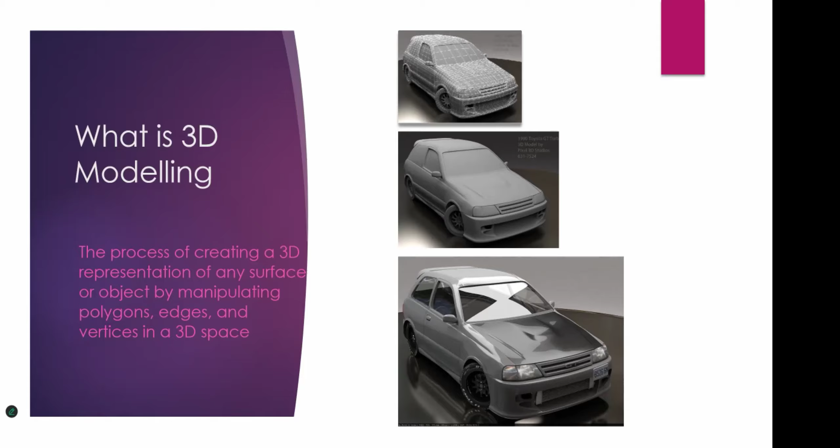You know, I didn't use SketchUp for sure, because what we learn is that there's different types of modeling, and SketchUp is only one of the types of modeling. And you use different types of modeling depending on what you are creating. So I'm just looking for this file here to show you as an example.

Okay, hopefully it will still open because this was a long time ago. Anyway, all right, so we have what's called solid modeling. You have what's called digital sculpting. You have some different forms of modeling, including 3D scanning. This is where you use something to scan something, where technically you're not really modeling, you're just generating the model. So we were doing solid modeling.

And here's the funny thing: there isn't a definite official list of modeling techniques. People will just make up a name. So they'll say, I am CAD modeling. CAD modeling is not even really a type of modeling, but because they're using AutoCAD, they would say I'm CAD modeling. If I'm using Revit, some people would say, oh, I'm Revit modeling, but that's not a type of modeling either. So I'm just saying you're not going to find official types of modeling. Some people refer to a type of modeling in their own kind of style.

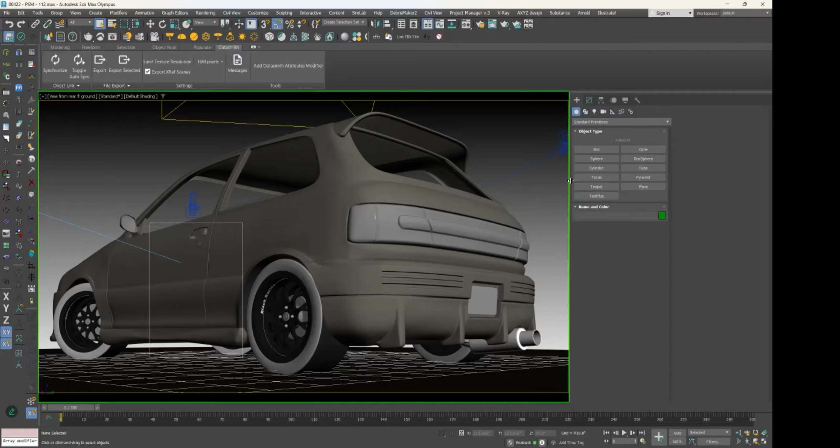This is the actual model. This is the scene for it. There's no insides, it's just the shell, right? And if I go to the wireframe here, you'll see all of the different nuts and bolts and all of that stuff that's there, right? So this is Studio Max, and it was done something like this.

This is another type of modeling called spline modeling, right? And you normally use this type of modeling to get very organic forms, right? So if you had a very organic looking thing that you wanted to create, it would be much harder for you to do that using surface modeling or solid modeling. So you would have to use spline modeling. Of course, SketchUp doesn't have spline modeling.

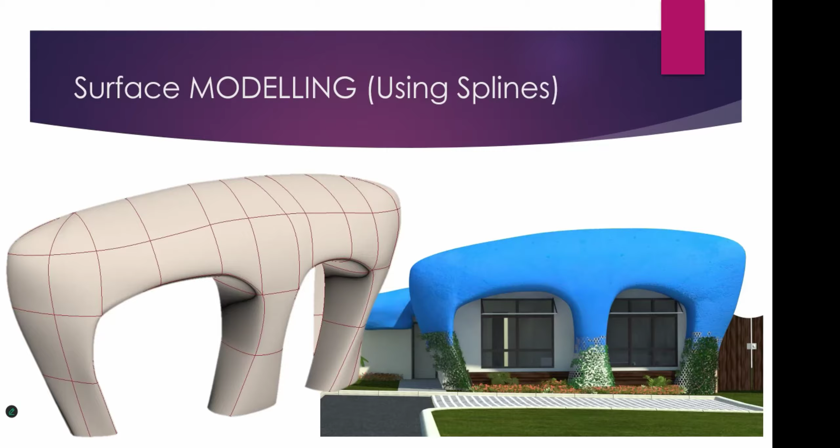This was actually a project that I did a long time ago. It was a facade for a building, and they wanted it to look like something from the Stone Age to make it interesting. But to model this kind of shape, I didn't use SketchUp, and I didn't use Revit, because Revit does a type of modeling called parametric modeling, right? And this is spline modeling. So this was done in Studio Max as well.

This is another type of modeling called digital sculpting, and how that works — well, I thought this was a video, but it's not. Anyway, anybody here paint? Anybody paint for fun? Yes sir. Right, yes, cool. So imagine you have a canvas and you're using your paintbrush and paint, but for digital sculpting, you're doing it in 3D, and it's like clay. It's just that you're not using your own hands — you're kind of rotating the model on screen.

So digital sculpting is normally used to create organic forms — faces, monsters, biologic stuff. You would use that kind of modeling. It's like clay, you know what I mean, but it's just that it's on the screen. So we don't do a lot of that in architecture, but it's a type of modeling as well. 3D Max doesn't really do sculpting — you would have to use a program called ZBrush. Don't know if you've ever heard of that. But yeah, that's just another type of modeling.

Okay, what else do we have here? Procedural or parametric modeling — I know I keep giving you multiple names because different people call it different things. This is what we do in architecture, when you use ArchiCAD, not SketchUp though. SketchUp is not really under this list, SketchUp is more solid modeling. But when you use ArchiCAD, AutoCAD architecture, then fine, Revit definitely — all of these programs are what you call parametric modeling, or procedural modeling.

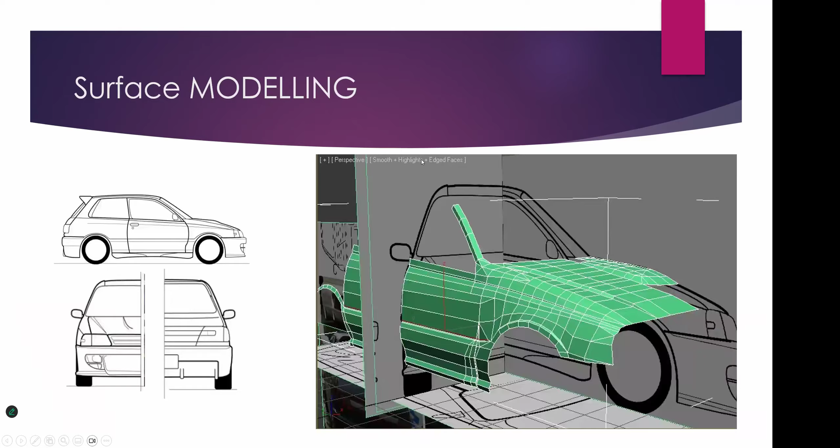All right, so that's just a quick intro to the type of modeling. Now we're going to be doing this one. I want you to whip out your SketchUp, and that's what we're going to be doing.

So the first thing we're going to learn today is how do we sketch in SketchUp. After all, it's called SketchUp for a reason, right? When we used it recently, we weren't really sketching—we were following very precise instructions. So I want us to test out how do we sketch in SketchUp.

And then when we're done with this, I'm going to throw out a quick, like, competition—well, not competition, but I'm going to give you something to sketch and see who can sketch it first.

Anybody here ever used SketchUp before, before this course, this class? A little bit. A little bit. Barely. Okay, that's barely. All right, so you won't be disqualified from our little trial.

But before we go to that, we need to get our hands around SketchUp because it's not just about line work. Last time we learned how to draw lines, turn them into solids, push, pull, subtract, that kind of stuff. But SketchUp can do other awesome things specifically for architecture that will make your life way easier going forward.

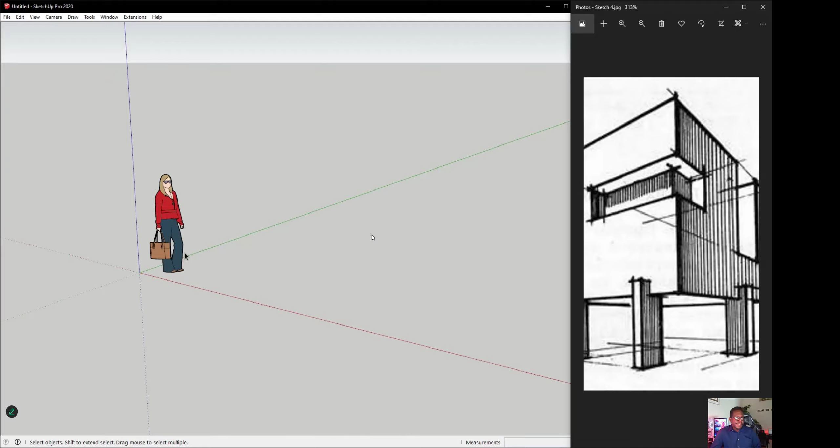In SketchUp, the great thing we do have is a nice proportional figure here. So we have a rough idea of how tall an average person is, maybe 5.5 feet thereabouts. Right away we can use this to judge stories and heights and things like that.

This is important because it is important that you rely on quick sketches. A sketch can get the idea out of your brain real quickly. The 3D will expand on that idea after you create what you had initially sketched. So we're going to look at how we would start with this model here.

Okay, so now if we are to start a sketch like this, the first thing we'd have to do is kind of analyze a bit of what's happening here. For example, we know that this is basically on a square base.

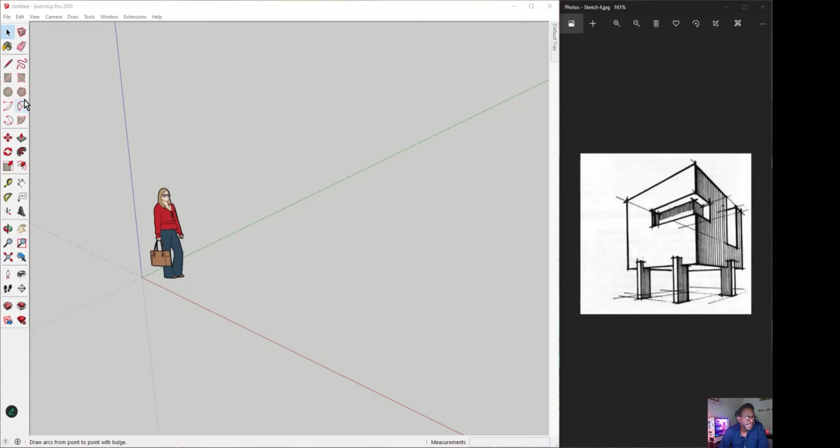So the first thing we could do is perhaps draw a square base, and I'm going to use my rectangle tool that is located here to do this. Now if I use that tool, I'm going to start from the center. Remember, this is an estimate, so I'm going to assume that it is a square. Notice I get that guideline to tell me this is an even square, and I'm going to make an assumption that maybe my building is about this big.

Now remember, I don't really have any measurements. Instead, I'm just assuming that perhaps a person would be about that stature. So maybe this level here is perhaps one story, so it's probably about 10 feet thereabout.

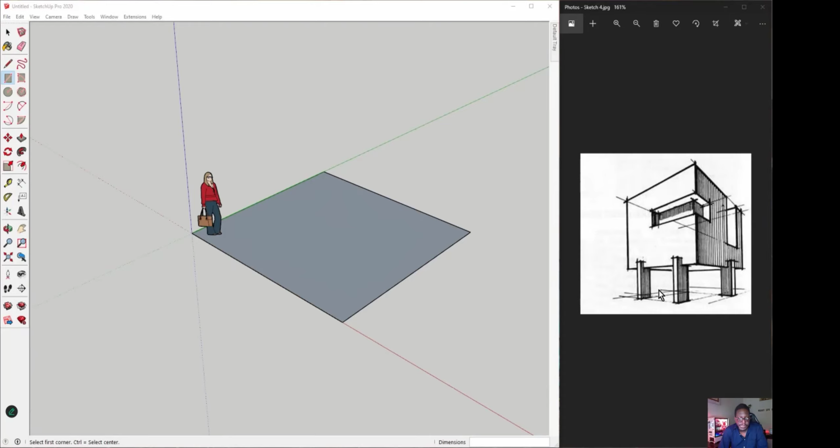Remember, this is really coming from a sketch, so a couple of assumptions would have to be made.

Now, if I look at how the legs are turned, I could assume that maybe there is probably something like that, maybe something like that, and on the other side it's pretty similar. Remember, because it's a sketch, I don't know exactly what's happening on the back side, but I can only assume, and this is the power of 3D. Now we have to start making some assumptions—maybe there's another one on this side, I'm not sure, but we're going to go with that assumption.

Okay, so we are going to get perhaps another rectangle tool like that. Now there is one very important fact that we need to consider when using SketchUp.

SketchUp has what I'd like to term as sticky fingers, meaning—notice I've drawn this shape over here—if I use my move tool, which is located here, and click at a location to grab the object, so I click once. Sorry, let me highlight that object first.

So I'm going to use my selection tool, highlight the object, then use my move tool and click at a location to grab the object, click once, and then move the mouse. I'm not holding down on the button, but just clicking once. Now when I move this here—you don't have to follow me, I'm just demonstrating what I call sticky fingers—and I drop it there.

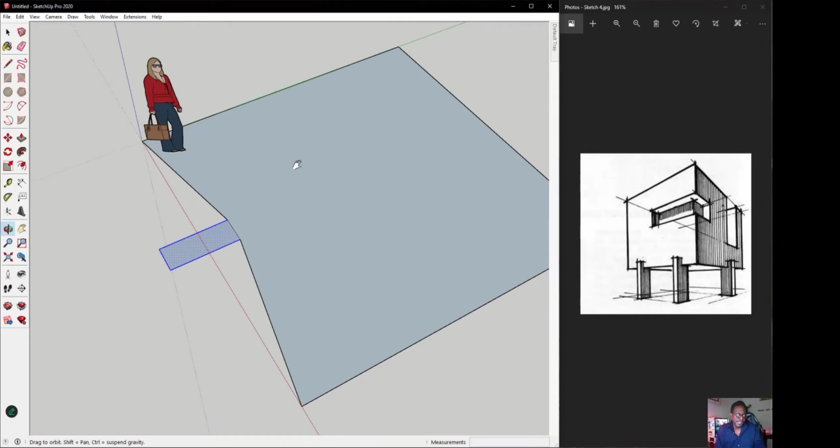This is perhaps one of the primary things you need to understand of how SketchUp works. This is kind of unique to SketchUp because if you use a lot of 3D modeling software, this feature is actually quite weird in my opinion. So anyway, I'm going to undo that. Remember, once two shapes touch, doesn't matter even if it goes inside, it has now become a part of that shape. It's now stuck together.

So what we want to do, to avoid this, is turn this shape into a group or a component, and we're going to look at the difference between the two.

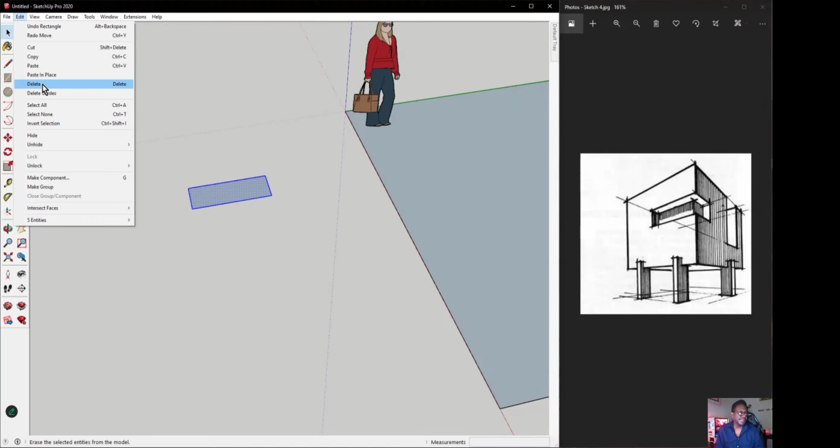Now when something is a group, it's all individual. So for example, I can select this, and let's say I want to make a copy of this. I could do the regular copy and paste. I'm going to put this over here. Now this copy, what I'll do is right click and say make it into a group.

Now notice the different terminologies that currently exist. You can have an object as a group, or you can have an object as a component. So again, if I right click, I can get the option to make it a group or a component.

Now I'm going to make this one a group, and now it's a group. So let me use my selection tool and deselect. If I click on this shape, the entire shape selects.

This is my original over here, and if I click on it, notice that I'm still able to select one line, and I can select another line, and I can actually click my move tool and just move this line alone and so forth. But if I click on this, I'm not able to select one line. It's going to select the entire object, and if I try to move it, the whole object will move. That's because this object is now a group.

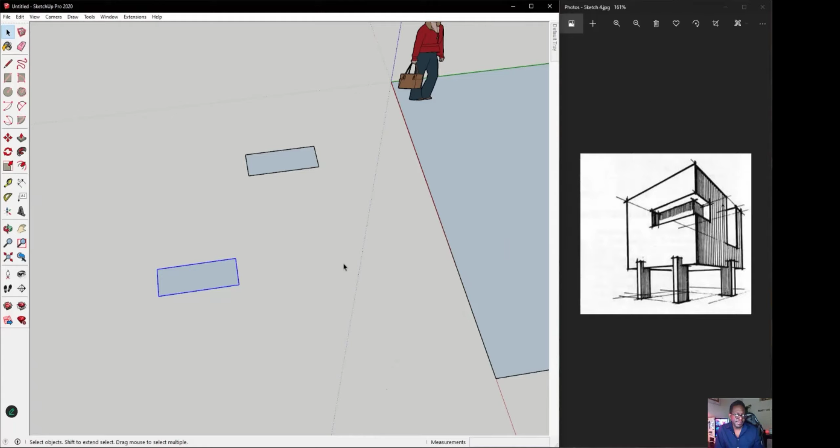Now once an object is grouped, it doesn't suffer from the same sticky fingers. So for example, if I highlight it first and then go to my move tool and move this object here, then voila, it does not stick to the object because it is kind of encased in a group, right? Not exposed to this sticky fingers syndrome.

Now there is another interesting thing about groups, and to demonstrate this, I'm going to copy this original again, so let's keep track of it. This one here is the original, and this one here is a group.

That's G, so that represents group, and this is the original. Now if I select the original, I'm going to do the same thing again, copy and paste that over here. This time I'm going to right click it and make it a component.

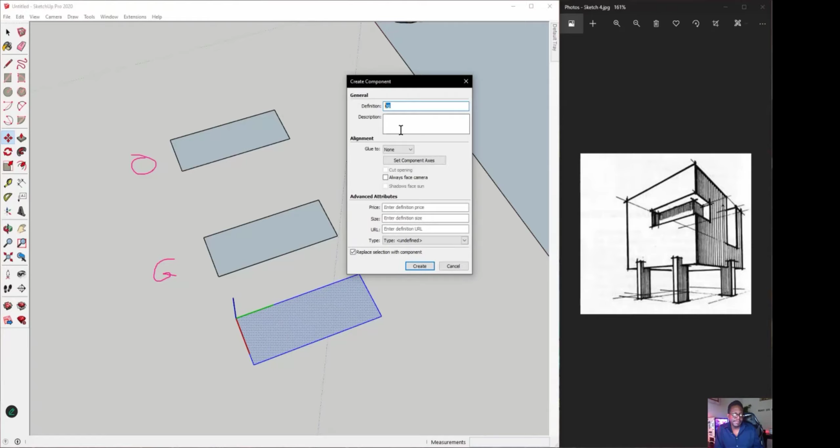Now when I make it a component, it's going to ask me to name the component. I'm going to call this example, because I'm giving an example, so I'm going to name the object example. This is essentially giving this component some properties, right? You can see you can give it size, price, and name. Essentially you're adding more information to this object, but we're just going to add a name called example as the only information. I'm going to go to create.

Now what we have here is a component, so I'm going to put C there because this is a component. Now the interesting thing about components is if I copy the component, so I'm going to go copy and paste. I've now copied the component, and I'm going to do the same thing to the group. I'm going to copy the group and paste the group. All right, so in here we have a component, and here we have a group.

Now I don't need to copy the original, we have been copying it since, but I'm still going to copy it, so I'm going to copy the original here. So here we have the original object. Now the thing about this is, as you know, the original object is really just two different objects, but of course we know when something is exposed as an original object, once it touches anything else, you try to move it again, it becomes stuck. So we know that when you have objects in SketchUp, that is what will happen.

Now of course, if the object is a group and we move it, I'm going to start using the shortcut keys, which is M. And if I move it here, then I can always move it again. I have no worries.

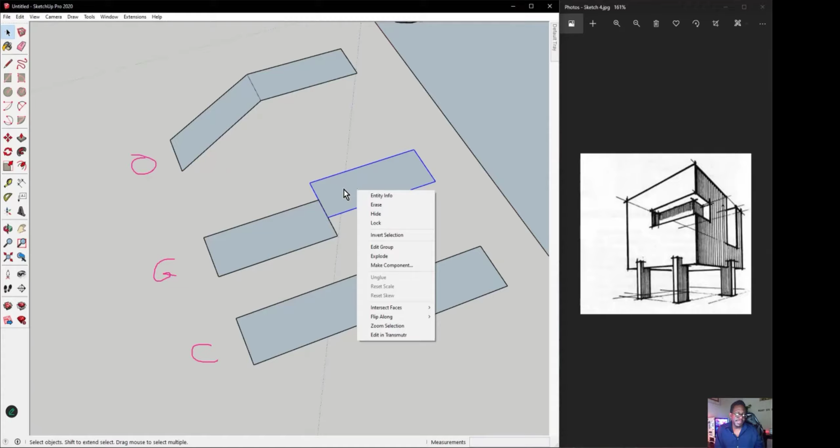So if I wanted to go back and edit this shape, the easiest way would be to double click or right click and go to edit group. Let's use the double click, because that's the most popular method. So I'm going to double click.

Now notice when I go into this group, everything else becomes gray, and this is telling me that now I'm inside this group, and I'm able to select these individual lines, which are the elements that make up the group. So if I go to my move tool, I can actually manipulate this group like that.

Now if I wanted to save this, the easiest thing for me to do is use my selection tool and just double click in an open area. And that is how we manipulate a group.

Now that I've come out of the group, it's a single shape again, and I can just move it around as one element. I don't have to worry about the sticky fingers and so forth.

Now on the other hand, if we edit a component, I'm going to double click this now, just like the group, and I'm able to go in and modify these elements. However, the big difference here is that when I modify one element, you notice both elements actually change.

Now if I come out of this component group, I can still have these separate objects. So I can still move these around and they function as objects. However, you can see that these two objects are actually linked together.

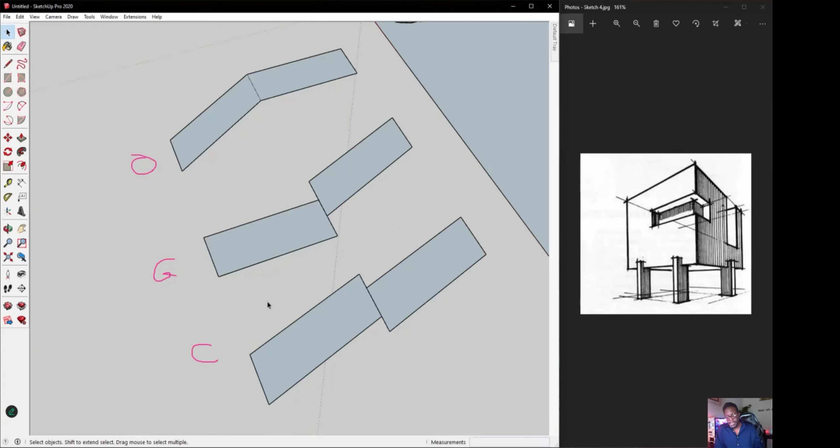So you can think about things that repeat, like balusters or columns, and there are many other uses for this feature. You might need something grouped so they don't stick together, but in some cases you don't want one change to affect all of them, and in other cases you do want that. So these are the three examples between group, component, and just a regular object in SketchUp.

All right, so now, pretty cool, guys. Everybody understand that concept? Yes, sir. All right, cool. I know Levy understands, but what about Rutan? Can you hear me, Rutan? Yes, sir, I'm here. You following? You understand that concept? Yes, sir, somewhat, for the most part. All right, cool, very important going forward in SketchUp. All right, cool, let us proceed.

Now that we have that example down, we can start to plan how we want to do these columns. I would make these columns as components because they're going to repeat. So in this case, I would draw one of the columns first, and notice that I'm drawing it on the outside because I don't want it to touch this element yet, or else it will stick.

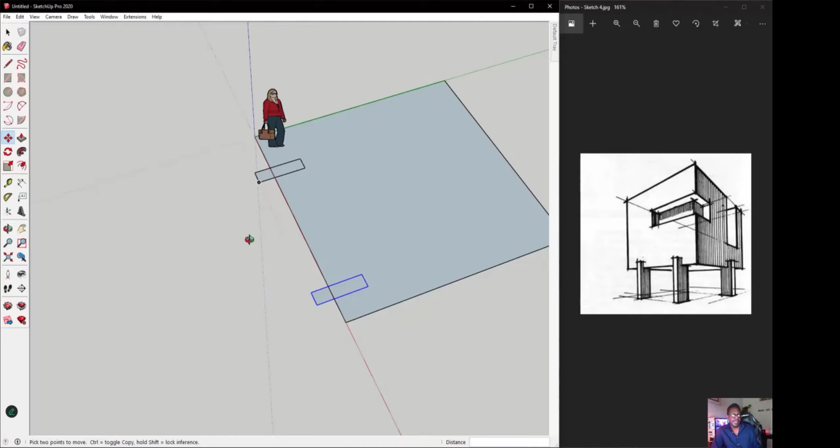And I am going to put another column on this side.

So then what I would do is copy these now. There we go. Then I would rotate, using the rotate tool here.

The rotate tool can be a little tricky to use. How it works is you need to first position the protractor with the first click. The next click is to rotate the protractor, so I'm going to rotate it this way. The third click is to rotate the object according to the protractor. So you have to do 3 clicks to let the protractor work.

Now there are some additional techniques with the protractor, but we'll touch on them as we go along further.

All right, so we are going to move this one back here, and this is representing this back column. All right, so these are all components, so the idea is when we extrude one, all 3 of them will change. Now you can keep an eye on what these objects are in case you don't remember if this was a group or component.

You would find that in your default tray under entity info. When you expand that, you would see it says you have a component selected. If I selected this object, you would see it says you have a face selected.

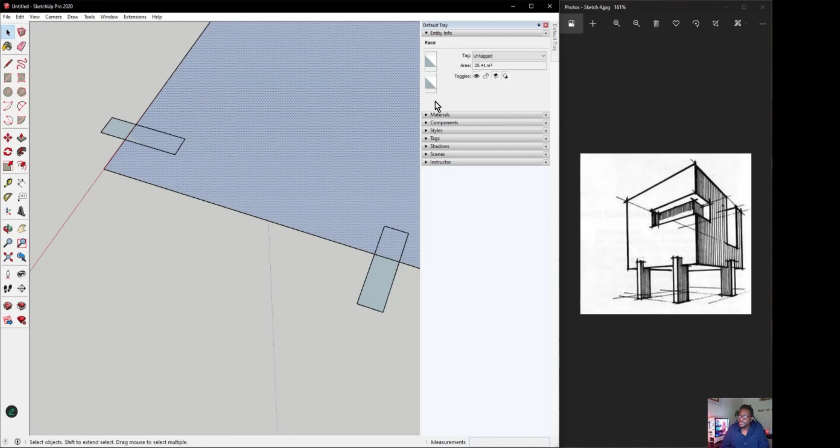Okay, the next thing we want to do is figure out what we're going to do for the back. So I would say we copy these 2 guys, select these 2 items here, and copy that. Control C, Control V. There we go, and we're going to just hover here and use the polar snapping to get the angles right. And then I'm going to assume there will be another piece like this.

What's up? Yes sir, it seems like my polar snapping is off. How can I turn it on?

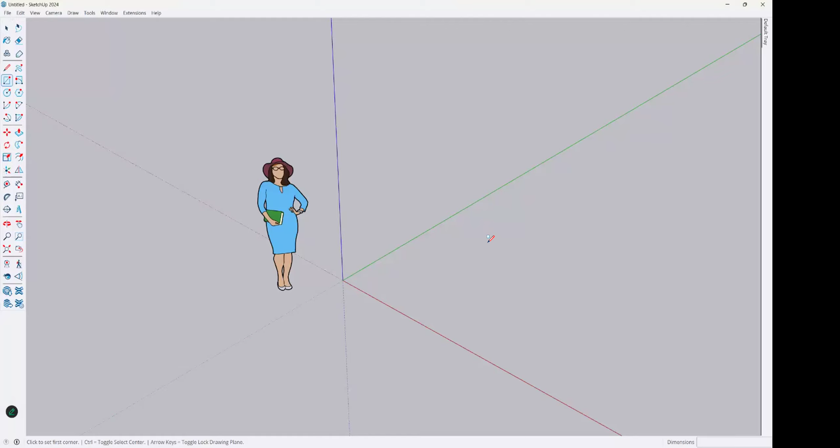You don't really turn off polar snapping, but you can turn off snap. So polar snapping can be a little tricky, you have to kind of... so when you have your shape, you have a shape here, so...

Let's make this a group. So when you move it, you're getting this dash line, right, when you move it. It's working now, sir. It's working. Oh okay, cool.

How can I have the column equidistant from the center? You're sketching, man, don't worry about that. You're sketching, sketch. Cause when you're drawing on your piece of paper, you're not worried about all them things. All right.

Control C, Control V, and I'm going to copy that maybe over there. All right, now we have those.

We need to extrude this now, and to do that we're gonna double click so that we can edit this group. But the idea is, because these are all components, we're able to extrude one and extrude all.

Now if this is going to be the height of a floor, then this is probably going to be about this high. We're going to use the selection tool. So guys, don't even try to type in a height for those columns, just use the figure you have in your SketchUp model and just judge, say it's supposed to be about this high. Remember, we're sketching in 3D.

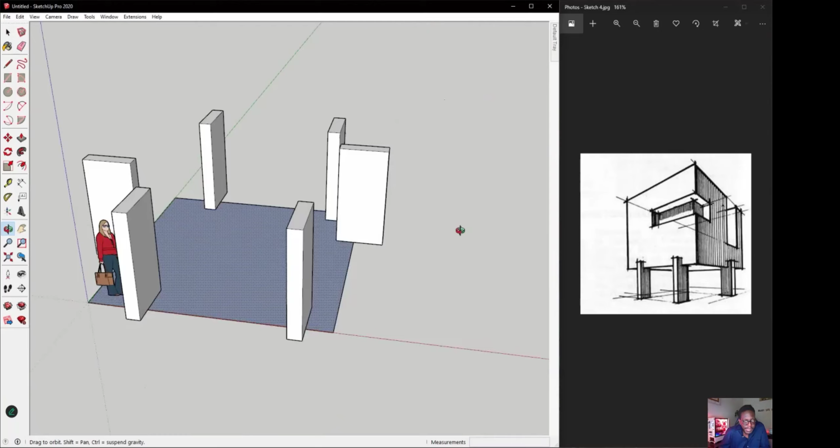So let's do that. We're gonna select the base here, and then we're gonna copy it upwards. Now there's a trick to doing a copy in SketchUp. If I go to... there's actually a... let's go here, and...

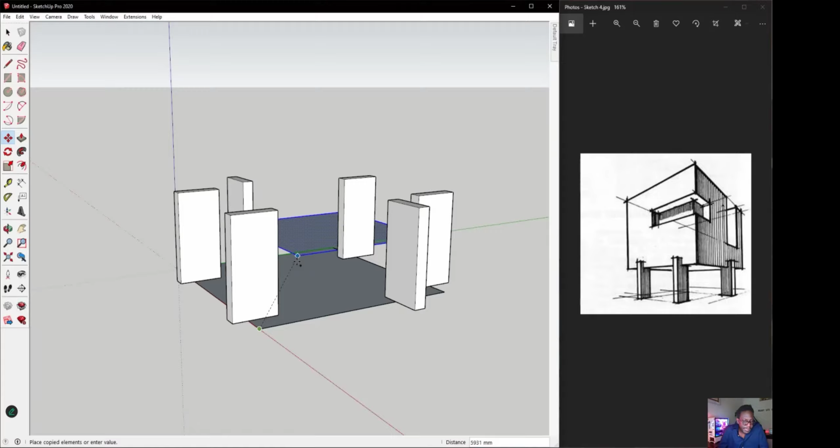Now to copy in SketchUp, what you want to do is, well first we need to select what we want to copy. Now we have been copying using Control C, Control V, but we can also copy using the Move tool and holding Control while we move. So in this case I'm going to grab this corner like this, and here is the trick: in order to copy this going upwards, I would need to orbit so that my view is mainly flat, and that way, remembering to hold Control, I'm able to copy this going upwards like that.

So then I would have created the base of this object, which is that element there. So what is left for me to do is to extrude this object upwards.

And I would say maybe this is about 3 times the height, maybe like that. Remember, what we're doing is creating a kind of sketch.

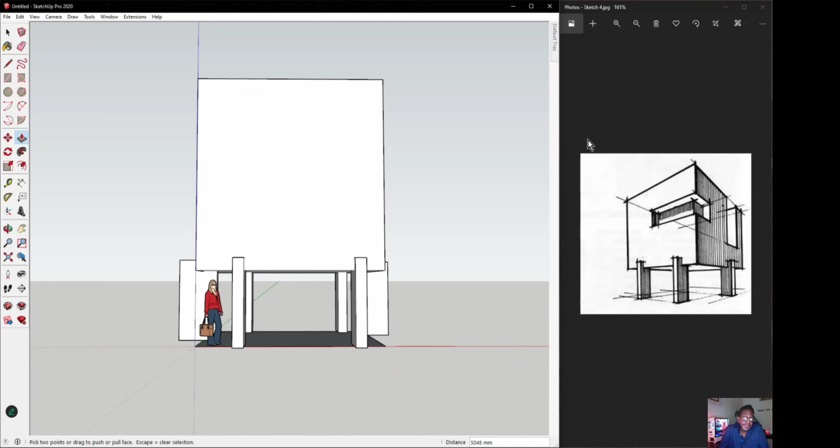Now another interesting thing is that the perspective on this shot is a bit different. So in order to allow this to look like this, we would need to adjust the angle of view, and we can do that by going to Camera and Field of View, and we're going to click, hold, and drag. Now as we drag, you see that we're getting more of a worm's eye view, right?

The building is becoming more skewed, which is a little bit similar to this view here. Now the next thing we want to do is go back to the Move tool, and we want to start to cut this window shape out. So to do that, we're going to use the pencil tool, and draw on top of this, using the axis to guide us, so we know we are going vertically down and horizontally across on the X. We're going to do the same thing for here.

There we go. All right. You hearing me? Yes, sir, I can hear you now.

How did you make it skewed? When you say skewed, what do you mean? Yeah, I think you went up top to select something and kind of made it look like you changed the FOV. Oh, the field of view. Right, yeah man, it's on the camera. Sometimes I get these mixed up. Oh, I see, no, on the camera, yeah man, it's supposed to be on the camera. Yes, I found it. Found it? All right, cool. Yes, sir.

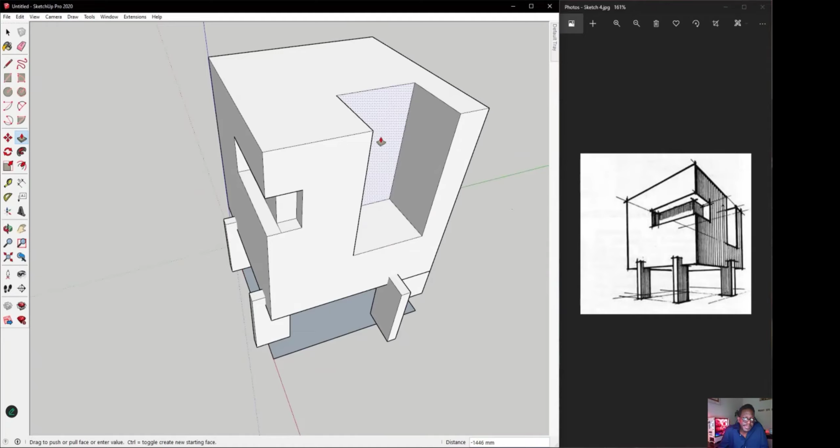Alright, and see, that was pretty simple. Now what I want you guys to do is try and imagine what happens around here, because remember, we only sketched what happens here. So I'm going to leave it up to your imagination to come up with suggestions for what happens here.

All right guys, anybody else following? Anybody else manage to follow as we model this out? So I'm about to push in the big rectangle on the right side of the wall. Cool, cool, cool. What about Raheem? How you doing, Raheem? Is Raheem here? It's coming, it's coming, it's coming. Matthew?

I'm going to have to watch your recording because SketchUp is currently installing for me. Okay, remember this is what I'm doing, you can use the web version, because everything here is still in the web version. But as we proceed, we're going to go into more advanced things.

Anybody else following in SketchUp? Anybody else? I know Gianna said she was working on her SketchUp. But nobody's messaging anything. What about Carla? Carla, say again? I'm getting through fine. You getting through fine? Yeah. Okay, cool, alright, no questions. I'm getting through, sir. Alright, cool, cool, cool.

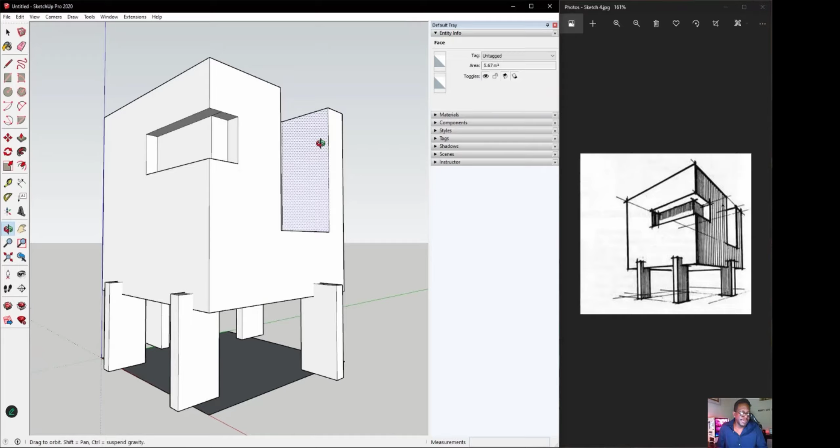Now, while that is done, we're going to use this opportunity to explore some of the features of SketchUp. When we're using SketchUp, we're going to go to our default tray here, and this time I'm going to pin it. So we haven't really been using this tray, but now we're actually going to start using it. Now I am going to look under, let's first take a look at some features.

So if I look under Shadows, I'm able to turn on my shadows using that button there. So what I need to do is click it, and notice that it's pressed, and then you can see the shadows on my screen. There we go. And I can adjust that shadow by adjusting the time of day.

I can even adjust the areas in shade, how bright or dark it should be, and the areas in light. All right, so that is a quick idea of how we get shadows going.

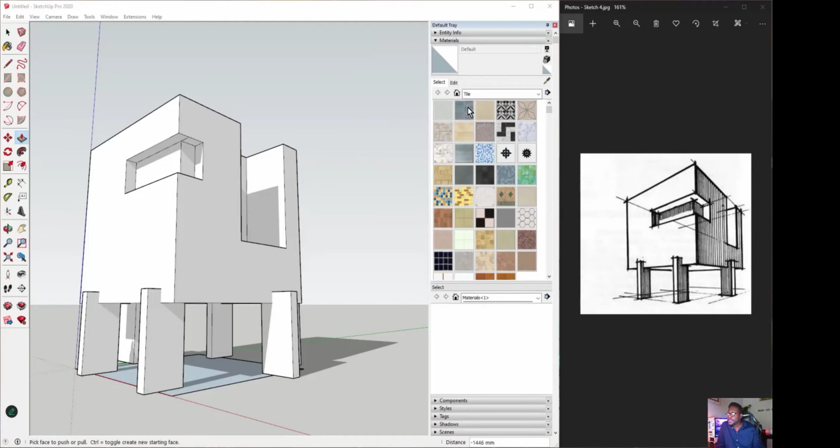Now the next thing we want to look at is our materials. You may have some materials built into SketchUp, however the materials shown here may not be included in your version. But let's not worry about that. What we're going to do first is just understand how this material tab works.

So if I take a look at this tab, yes, there are default materials here, and there is a preview window. When you click on any material or color, you will see a preview of it here. There are some icons along the side, but let's go to this drop-down menu, which shows categories of materials we can choose. Depending on your version of SketchUp, you may not have all of these categories, but we're going to start with one we all should have: the color category.

If I scroll through, you would see quite a bit of colors here. Now what we're going to do is try some earth tone colors. So I'm going to go for that color there. Now in order to apply this, you will need to have the paint brush, the paint bucket tool, selected.

Sure, this paint bucket tool works very well.

Yeah, man, what's up? So that's solid colors, is that one? Yeah, use the solid colors on your end. Oh, okay, okay, so you should see all of them there. Yes, sir.

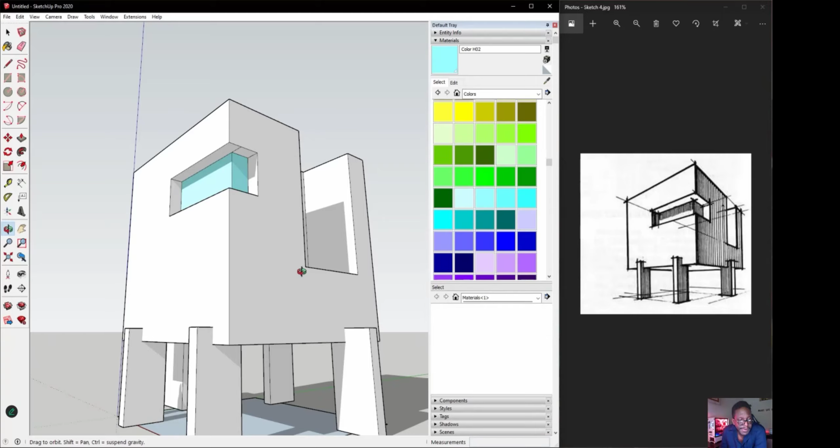So let's go back to our earth tone colors here. I'm going to choose something a bit light, and I am going to actually fill these areas in.

There we go. Now I believe this area is actually filled, but what happened is that the sun is a bit too bright. So let me go back to my shadows tool, and I'm going to adjust the brightness of the sun. Can you see that? If I made the sun really bright, it basically washes out the color. So I'm going to put it back at about 50%.

All right, let's color the insides. And let's get another color for the columns that we're doing here.

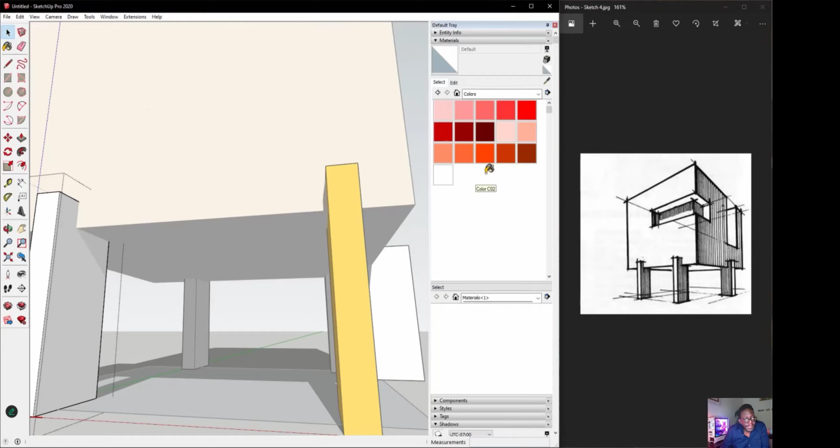So we're going to go to materials, and there we go. Now, of course, even though these are components, I can still color them differently. However, if I was to go inside one of these groups and then color the material, let's do an example here: all of them will have the same color, and it would actually override the color that it is given.

Because remember, these are components, so the idea is when you apply the color to one, it will apply to all. Alright, so that is just a quick idea of how we add color.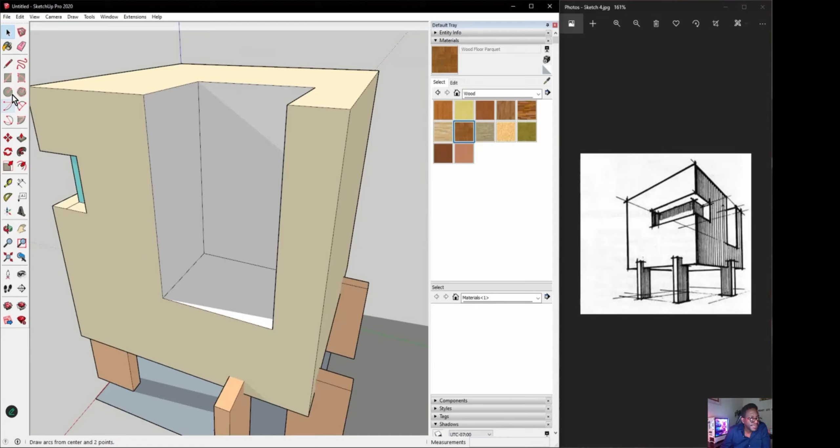Now texture is pretty much the same thing, so let's go to wood, and I'm going to choose a texture here, and pick the paint bucket tool. Oh, actually it's not applying because I'm still inside the group here, so I need to double click, use my selection tool and double click. There we go, and now I am able to apply material.

Now, as we get a little deeper in applying materials, you might want to change the scale of the material. You might say the scale of this wood is too small, I want to make it bigger. Now in order to do that, this is when we start to go into the properties of the material.

So we'll now need to go over to the edit side of the materials category, and under the edit side you can see a couple options here. First, you can see where the texture file is located, you can see where you adjust color, and the scale is adjusted by these two values here.

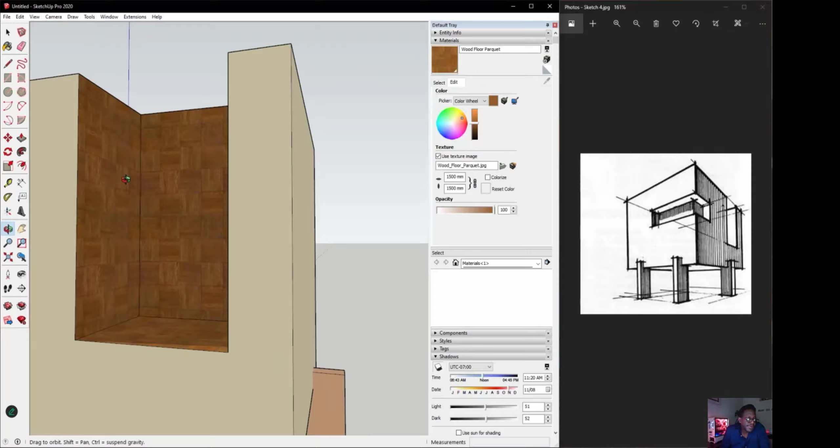So we're going to lock this. If we increase the size here and make it 900 by 900, you will see that the size changes. Let me give you an example. If it was 300, you will see the size change instantly. Let's try 1500, so you can clearly see now the texture size is much bigger.

Now, in addition to changing the materials, you can also create your own material. So let's create our own color. We're going to go back to select, and back down to color. Let's assume that none of these colors are ones that you would like.

To create your own material color, you go to this icon right here, and that icon will bring up whatever material we currently have selected. So we are going to maybe select white, and then bring it up.

Now it's going to show us a preview of what we have selected, but we can rename this. We can call this Brian's Red, and then we're going to pick a color. If we wanted to, we could use a texture, but we're just going to choose color for this, and choose OK. Now you see we have a color called Brian's Red, and that color is saved in the model. Now we can simply just apply that color to our object, and that is a simple way to add color.

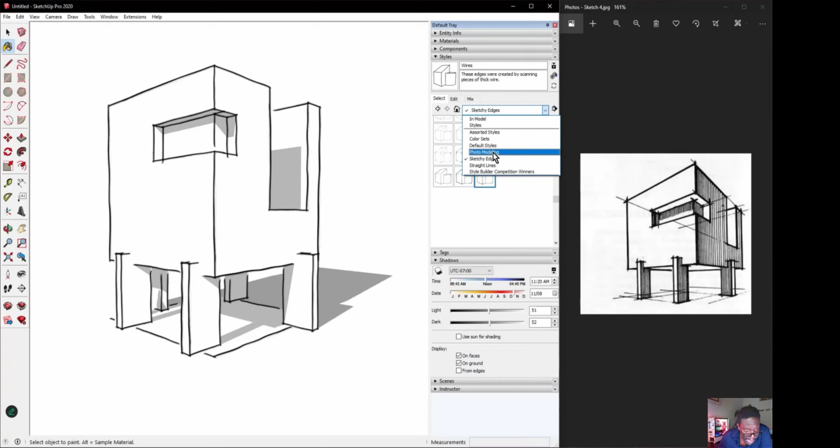Now things start to get interesting when you change it to, for example, Sketchy Edges. If you check out these styles, they kind of look like a sketch, which is pretty awesome. You can try the white and black, and you even have some with color, right there. If you see assorted styles, for example, this is another interesting one here. This one kind of looks like a marker.

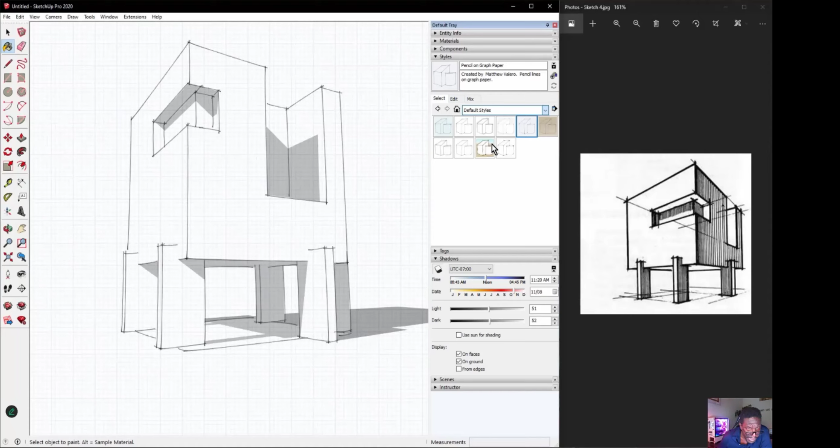And if you check out this category, Style Builder Competition Winners, you must be saying, wait a minute, you can actually build these from scratch, right? These are styles this person has built and they got featured in SketchUp. So if you want to build your own style, you're going to use the Edit tab. To see how this works, let's go back to default and put back our model on the first one, which is pretty much the default that SketchUp starts with.

Now when you go over to Edit, notice these main categories here. The idea is that in each of these categories, you would edit, and the full combination of editing each one creates your own style, right? So let's check that out.

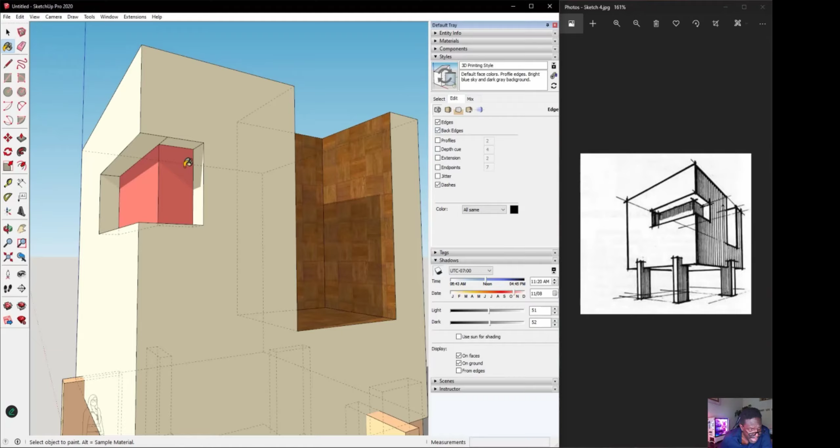If I go to the first option here, it's all about edges, and I want you to look at these edges as we change this. We can, for example, say no edges, and if you notice, there are no internal edges, no profiles. Now you see there's no profiles there. We can turn on edges, we can turn on back edges — you can see the little dash lines there for the back edges. Then you can turn on profiles, and profiles gives the bounding outline a particular thickness, and you can increase this thickness.

Let's put it to 7. Here we go, you can see a kind of thick outline there. Depth Cue kind of adds the line changes depending on how far it is. Then we have extension — this one is pretty cool. Let's put that to 7. To make you see it, let's put it to 50. There we go, it creates these extensions. You have endpoints, which kind of adds a little bulb to the end.

And then you have jitter, which basically allows the lines to look a bit more sketchy, as you can see here.

So you can come in, and all of these options are just about lines, and of course you can change the color. Now the next thing is the face settings, and each one of these has its own settings as well.

When we go to the face setting, we can say what is the front and the back face. Now, as you can see, this face has materials because we actually applied materials. So the option that we select here is shaded faces.

But if we select wireframe, then you would only get the wireframe. It can be white, and then when the faces are white, all faces would be determined by this color. So if I put this to red, or blue, well we see where that comes in a bit further down.

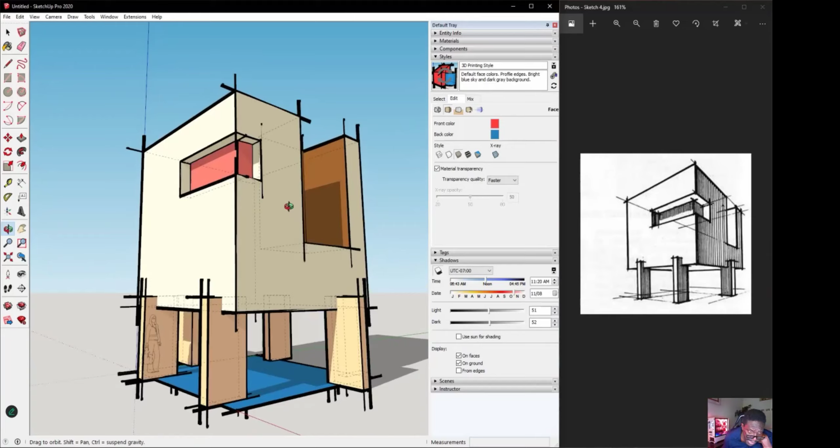But this is where all faces are practically monochromatic. And here we show all the faces. These faces have material, that's why you're not really seeing the material come through. But notice this base change to blue, and that's because we actually did not apply a material to it. So if we didn't apply material here, it would get these default colors.

Once we turn on this option... so how do I pick off this style? Just choose the default style. Or you take off the style, so you go back to the Default Tray, right here, and choose the default style.

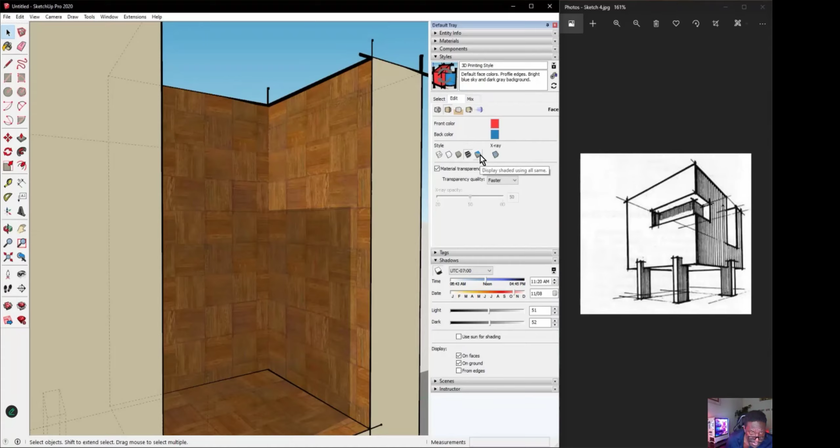Notice that it now shows texture. So this only shows color, and that shows texture. And of course this makes it all the same color based on what we select. Then X-ray mode allows it to be semi-transparent, and you can combine that with any one of these modes, so you can imagine the kind of variety you can get.

Then we want to speak about the backgrounds. Currently the sky has a kind of gradient, and the ground, well, we can adjust what the ground should be. We can also adjust the background here, but right now we have the sky. If we didn't have the sky, we would have just this background. If we didn't have the ground, we would have what we have here. So we're going to leave it on the ground, and that is essentially what this area does.

Now watermarks is what we're actually going to use to complete assignment 1. The idea of a watermark is that you apply an image that can help you align this image. We're going to look at watermarks more when we start looking at compositing, meaning mixing a 3D image with an actual photo, so we'll cover that in the compositing topic.

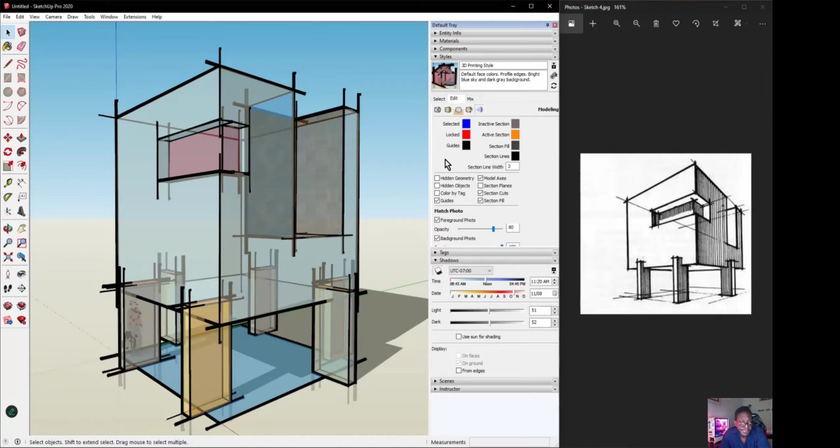Now, if we go over to mix, what mix does is, if you liked a particular style—let's say for sketchy lines you love how this line looked—you can drag this and drop it over the edge lines, and you will absorb the line from this style. Let's look at another one: say you love how the background looks here. You can drag this image over background, and it will grab whatever was used in this image. That's an interesting way you can mix the styles together.

Now, if you like what you've done here, you can save your style. So I could call this BDW style. There we go, and that way I can come back to it anytime.

So that was a real quick look at how we can model elements in SketchUp and simply model from a sketched image. Really simple, really intuitive, and how we can use styles to really enhance our drawing.

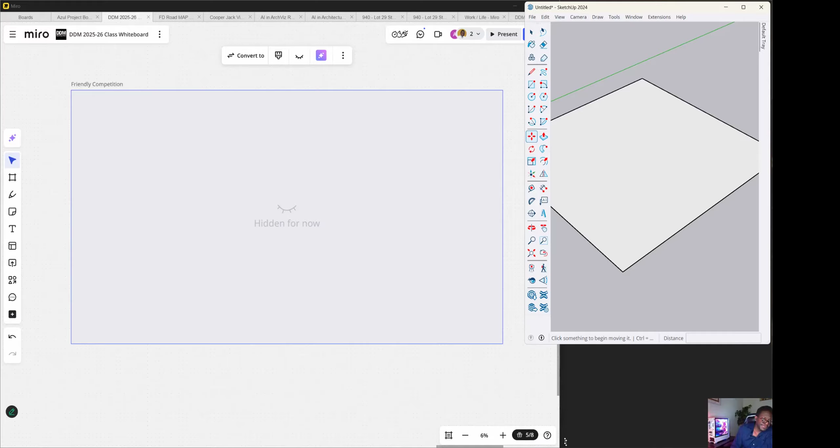So what I want you to do is to open up your SketchUp. So I see I have my SketchUp right here. I'm going to just minimize this because I don't need that. SketchUp right here, all right. And so we're going to go to File, go to New. So we have a blank SketchUp. Doesn't matter the units, guys, because we're sketching, right?

All right, I have a cool 3D mouse here, which is pretty cool. I'll show you one of these days, but I'm not going to use it. All right, I'm going to use mouse and keyboard like everybody else.

All right, now what I want us to do is I want us to whip up this sketch very quickly. All right, ready? In 3, in 2, and 1. Everybody ready? Yes? Yes sir, and go.

Pick anyone you want. Very rough sketches here, guys. Anyone you want, I want you to just whip up what you think this sketch is. I mean, obviously it looks like some kind of a tower, but don't bust your brain too much on it. Remember, it's a sketch, all right guys? It's not supposed to be, you know, we're not worried about dimensions and all of these things. All right, so I want you to just kind of whip that up.

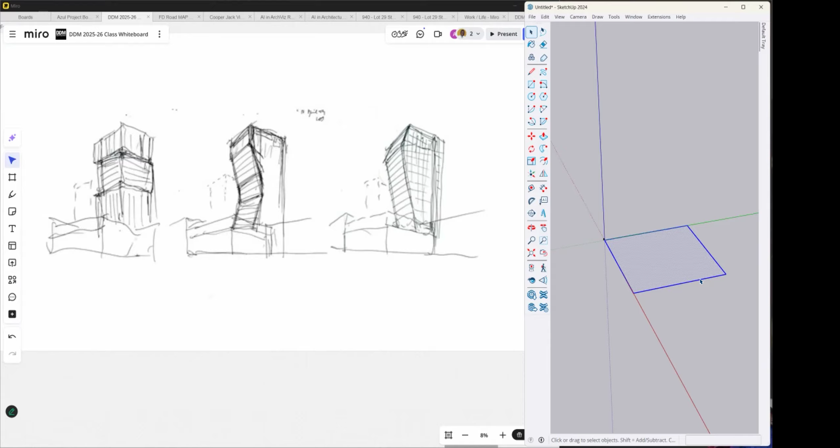All right, I'm going to also do the same. But I'm not really in the competition, I'm just building. No, why am I building? Then you're seeing what I'm doing, I don't want to show you. I'll put it over here. All right, you guys come up with your own thing, I will build mine over here. All right guys, 2 minutes.

Not done yet? Just make up stuff, guys. Just make up stuff, it's a sketch, it's not supposed to be logical. Any one of them you want to do. It needs to kind of look like it still, all right?

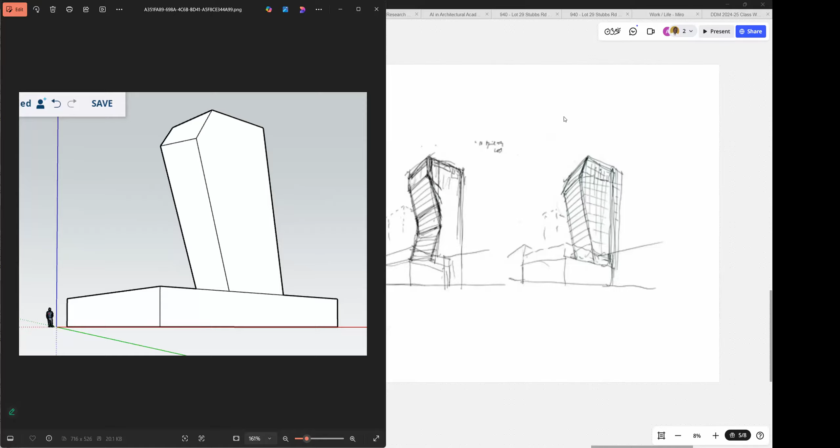Gianna, where's your screenshot? All right, cool, I see yours. I see it. All right. Where's everybody else? Oh, hold on. Couple seconds, sir. Couple seconds. All right.

I finished, I will submit now. Screenshot in the chat. Okay.

How's the trackpad treating you? Painful, sir. Painful.

Everybody tackle the same one? Okay. Which one is that one? Oh, that one? The one on the right. No, sir, I did a different one. Yeah, different one. All right, cool. Okay, so there's mine. All right, cool. Got you.

All right, Tara, while you submit - okay, so I have 3 concepts here, right? I also modeled it as well, right? And let's assume that this took, the last person to submit was Levy, right? So let's assume that this took 3 minutes, right?

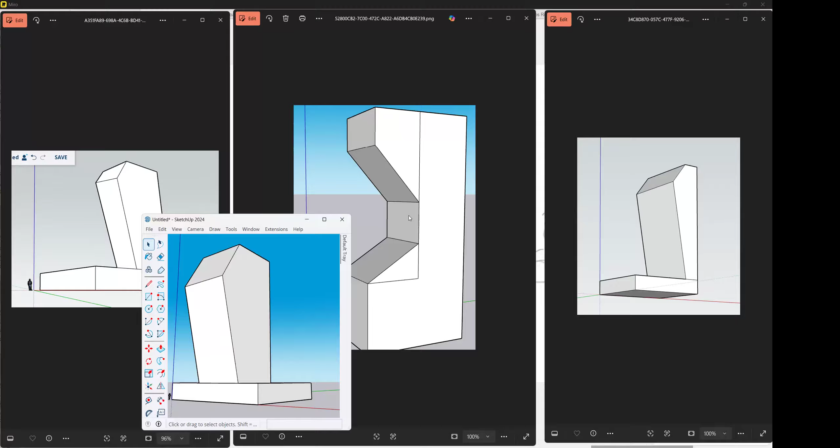So I'm gonna put this over here, and I'm gonna put this sketch over here. So now let's say that you did squiggle up this sketch - there used to be a guy in our class who used to call him Wiggles.

And the reason you can just drop the - what is it, Tara? I'm just gonna screenshot my screen and I'm gonna save. Just gonna screenshot and drop it in. Sure, no matter, it's just a sketch, man. It's like something in your sketchbook. Sir, yeah, I did the first one. Yeah, well man, drop it. Oh, I see it, cool. No problem, yeah, I see it here. Yep, I see it there.

Cool, right, so what I was saying is that, oh right, I was telling you about a classmate called Wiggles because he was really good at doing these kind of sketches. We call it, you know, the wiggle up sketches, so we end up calling him Wiggles. Yes, I see it, there it is. Tara, I see it.

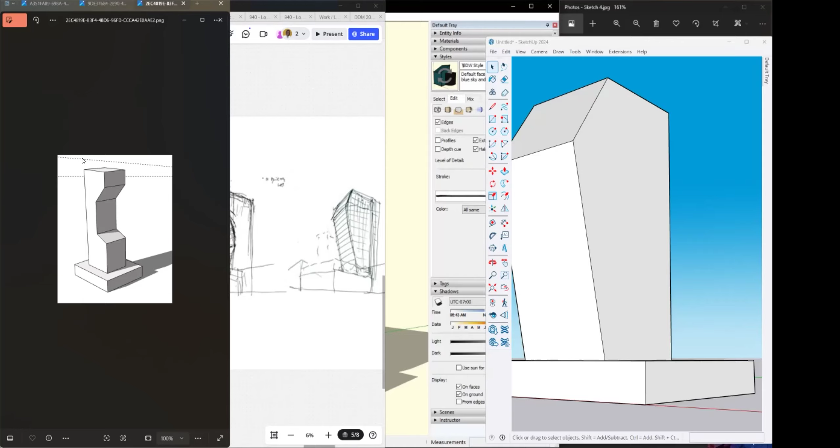Right, so whenever you have these wiggle up sketches, maybe for you guys to do a sketch like this probably took you 30 seconds to do one of this with like a pencil or pen, is done, right? It should take the same amount of time in SketchUp. The key is to try not to overthink it too much, right?

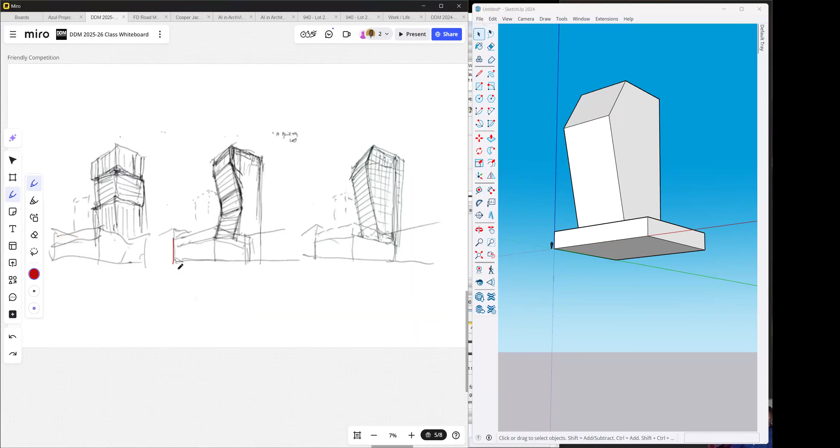So let's look on this second one here. I think it was Levy that did this second one. So the first thing to recognize is always break down what you're sketching into shapes and then make the shapes proportional. So right away when I look on this, I see some that's a little skinny - make this bigger, right, let's make this a little smaller. Smaller.

Right, so let's say I'm looking at this one. The first thing I see is a box here. Forgive me, I'm drawing with the mouse. This looks like a box. I see some business at the top, some kind of double line, but for now it's just a box. Let me draw it a little less ugly. And then below, I see another box that does this fancy thing, but really and truly, this is just a box too. Everybody see that? Just a box.

So if I was exploring this concept, the first thing I'd want to do is identify the main... what's the word again? It escapes me. Primitive, right. I identify the main primitives. Triangle, circle, sphere, diamond, those are primitives. They are like basic shapes. So these are just two boxes.

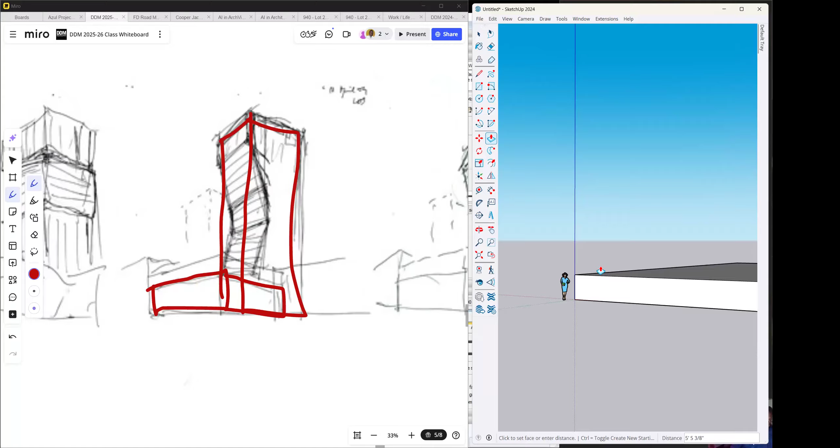So the first thing I would do, let me delete that. I would draw this box, then that box. So the first box, I'm going to just start drawing it here. Now I don't know the size of it, maybe it's this big. And I'm going to use my push-pull tool, but the height is important because if this is the height of a person, maybe this is 1 story, could be 2 story. I'm going to estimate it at 1 story, so maybe it's like that. I am going to just leave it at that.

Then this thing here is another box, right? And what I would try to do first, I would double click this and turn it into a group. Why would I turn it into a group? Who can tell me? Sure, so you can attach it to a next block without distorting it whenever you decide to move it. Right, I think I know what you're saying, but you can just say the word sticky fingers. You don't want to model something and have it stuck to it, right?

So this box is here, and then there's another box. Now what I would do is use the rectangle tool. Notice I use it a lot. I don't know where this is in relation to this, but let's just assume it's somewhere down here. I can even draw this box separate, or assume it's on top of this box here, doesn't really matter. At the end of the day, this is a box, and I'm going to extrude it just the same. Now how far am I going to extrude it? I don't know yet, but based on the proportion of this to this and this to up here, so...

And the trick is that I want to use the same kind of view as my sketch, because that is how we perceive things in 3D. So usually I would want to go and mess around with my field of view, and I want to make it like the same kind of thing.

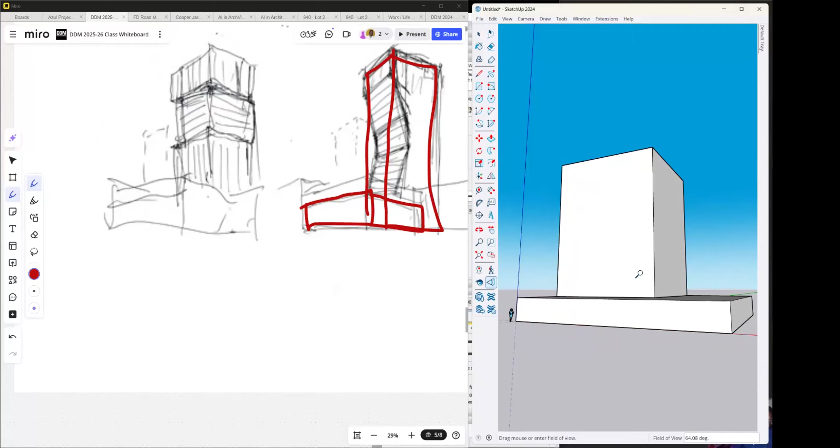Well, it's a little weird because I have... let me try it, dude, carry this over some more. Yeah, so that is not the tool. Yeah, so I would try to get the same kind of field of view like what I have here. In this case, this is more down.

Now what you can do in SketchUp sometimes, because you're going to get this weird perspective, you can go to view, to camera, and you can turn on 2-point perspective and down. That way it keeps everything vertical, just 2-point. And then once the views are similar, it's easy for your imagination to build on top of this, so you can say, alright, this thing cuts out somewhere in the middle.

So what I would do, I would grab my pen tool. Actually, this is even a bit more skinny, or this is taller, one of them. So I'm going to use my push-pull tool and kind of push this in, maybe push this in some more, so it's looking a bit more skinny like this. This guy here needs to come more to the front. So I'm just using the view that I have here, right?

Now I might have to orbit it a little bit. And I'm going to have to reveal this new feature for now, but I will expand on it in a little bit. So what I would do when I get the view right, I would save a scene. To do that, I'm going to go to my default tray here, and go down through all of these things here to scene. I'm going to click the plus. Don't worry about what I'm doing, I'm going to explain a little later.

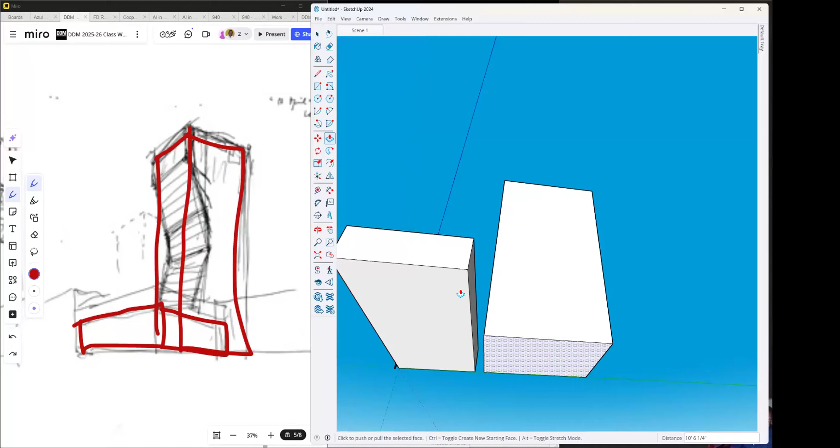All right, so let me go here. All right guys, is it looking more similar? You following me? Yes sir. Right, now the only secret to this is that I'm trying to build it while making it look similar to my sketch.

All right, so this part here, now all I need to do is maybe take my pen tool, cut across here, maybe like that. But you see, before you start to add detail, you want to make sure you get the massing nice. So I think this is a little shorter, so I'm going to just push pull this up some more.

I think here, so I'm going to just push this over some more. So yeah, now it's looking a little bit more similar. All right, so I'm just going to use my pencil tool now, and I'm just going to drag this over like that. And I think there's a point here, something in the middle, and maybe there's a point here, I don't know, I'm just making it up.

Then I'm going to click this point and just use my move tool and move this back, right? And move it back to like maybe, I don't know, here. I'm sticking on the x-axis. Now this is a little fat here, so I still need to carry this back some more, so I'm going to use my push-pull tool and carry it back somewhere. Go back to my view here.

Right, now what you realize guys, it's very, like if I wasn't in the same view, it would be hard for me to even estimate what is happening. The secret is that you want to be in a similar view to your original, because this drawing that you did here is based on your imagination. And when you are having an imagination thought, it's not really bounded by logic too tough.

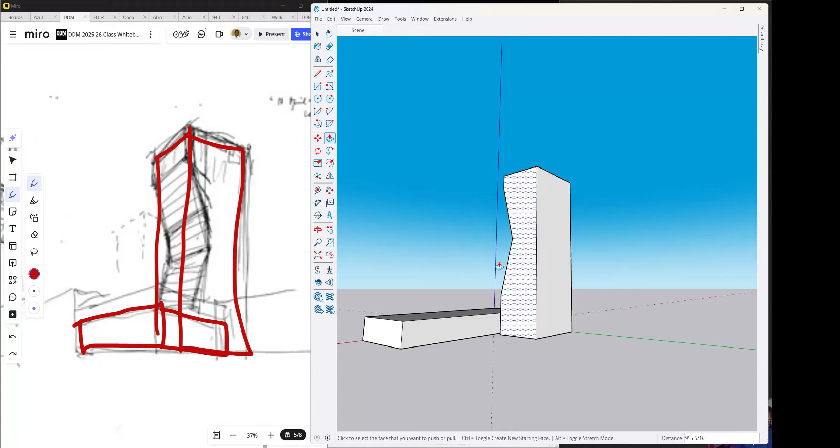It's just your imagination. But when you are in SketchUp, you're kind of bounded by logic. You're starting to say, oh, how high is this? Hold on, how far is this from here? And how tall is it? But when you are in your head doing this sketch, your brain wasn't doing all that stuff, right? So at this point, you're basically done.

Now what I was saying earlier is that now that you have produced this in 3D, you are now free to add on top of this. You have achieved what you imagined first, and then you start to add to it. So maybe you say, no, all right.

Right, so maybe you want to expand this here, and maybe you know you're going to start exploring. Let me use the offset tool. Maybe you want to explore some kind of interesting element here, do some fancy push pull, you know what I mean. And then, so what you're trying to do now is you're trying to build on top of this.

And as I said, sky's the limit with this, guys. You can just go to town exploring all sorts of ideas, but you can only do this once you have it in 3D. When you're stuck in this sketch, you're kind of stuck with it. So my advice is that once you have your chicken scratch sketch like this, recreate this exact chicken scratch sketch quickly in SketchUp, and then play with it. Push and pull it and play with it until you get what you want.

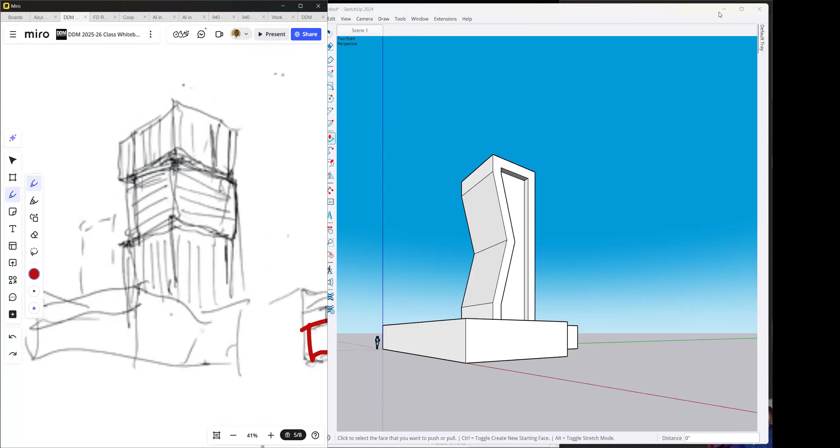Yes, sir. All right, so what I want to touch on now is part 2 of what we're talking about, and this is particularly linked to the assignment. We're going to push things even further in SketchUp. How do we combine SketchUp with other programs, like putting something in Photoshop to make it look nicer? That's the other half of what we're looking at today, and we might have to go through it a little quicker because I think we got lost in the whole sketch thing a little too long.

Totally my bad. Okay, welcome to another one. So we're going to look at this here, and we're going to talk a little bit about compositing with SketchUp.

Okay, welcome to another practical session. Now in SketchUp, we can save images out of SketchUp and put them into other programs.

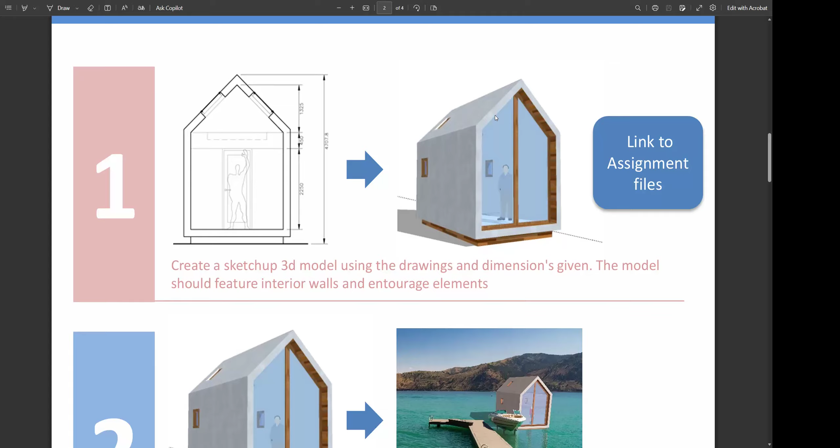In order to do that, the first thing we're going to do is model this building, which is the cool part. We're going to use the same solid modeling we did before, doing it about 70% by measurement, and the rest you make up in your head. The overall dimensions you will have, but you're going to add your own creativity to it.

So there are some dimensions here. The next thing we're going to do is take our image and place it in a photo—you choose the photo from a list of photos that I give you, and you're going to place your image in the photo. I'm going to show you how to do that using SketchUp.

And the last thing we're going to do is put everything together. This plan that you see here—sorry, not in Illustrator—where is it? Oh right, this plan that you see here was done in SketchUp. That's this plan that you see here.

The side view, the front view, and the section. Remember guys, we did this already with the Lego block—we're going to be doing it with a much more exciting model now. Along with the image that we created in Photoshop, we're going to put all of it together on a sheet, and this is in layout. That is the 3-step process that we plan to do.

So the first thing, we're going to model this building, we're going to do some photoshopping, and then we're going to put everything together in layout. So that's going to be really cool. All right, and we have a couple of weeks to do this.

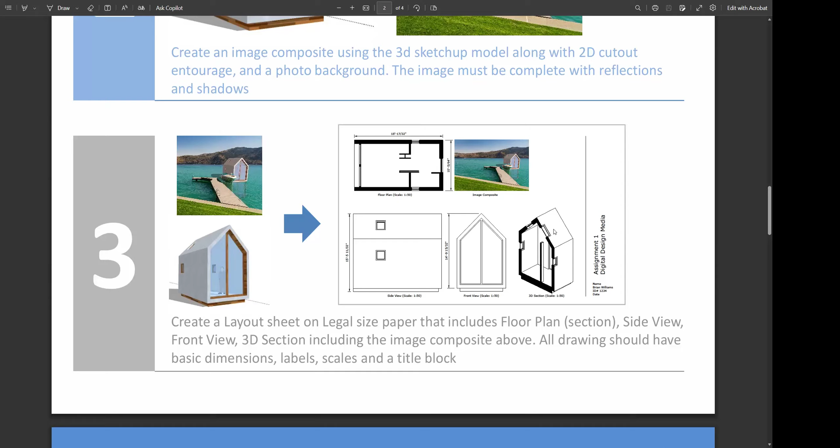So what I want to talk about is how do we get our image from SketchUp into Photoshop to start doing some nice stuff with it, right? And that is the other half that I wanted to speak about now.

All right, so now I'm going to be choosing some different images, and the link to select the images is on the handout. It will link to a folder like this.

I'm gonna pick one image. Let's look at entourage components, looking in the background example folder. You don't have to select the same image as me, you can choose from the different background options that you are given. You can't just pick a random image, you will lose marks if you do that. So let's see, this one here looks pretty good, or for example, this one.

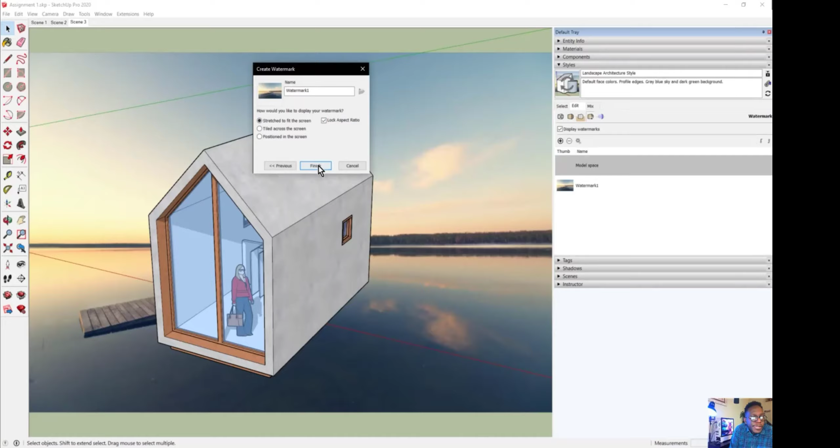So now what you're going to do is angle your building so that it lines up with the image, and you do that by panning and zooming and getting the image just right. Now you also have to watch your perspective, because this image has the perspective a little bit wider, I think.

So I would go to View and Camera, and go to Field of View, and I'm able to just change my perspective a little bit to better match the image here. Push it up a little bit, and you can see how your lines are aligned to the image. You can use that to help determine how it would be.

Now you can additionally decide to put your building on the opposite side here. Let's orient that a little bit. Once you have your building roughly in place, you are going to create a camera. Let's give another image a swing here, because some of you might choose an image that is a bit more challenging to align. This one is not so bad.

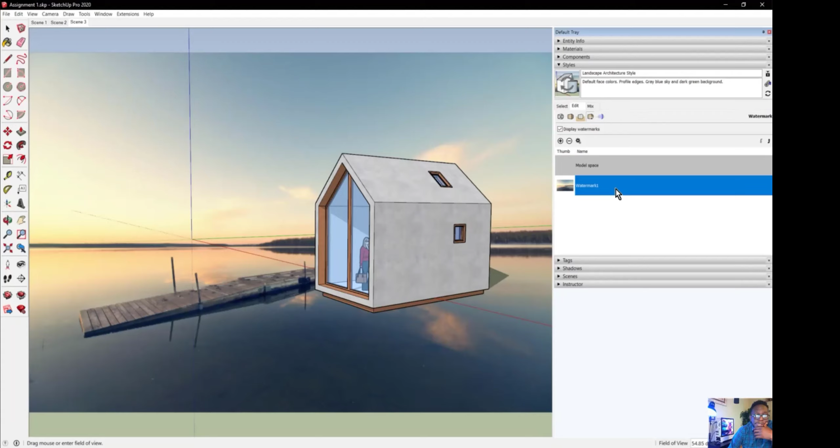Yes, let's look at this one here. So I'm going to download this image again, and go back to SketchUp, and this time I'm going to choose the minus to delete that background. I'm going to go to Add, and add this new background, doing the same things I did just now, going next and next and next, and there we go. Oops, actually I put it on blend.

Let's edit that, I think we can edit that. Okay, let's remove it again and add it back. There we go. Yeah, we want to change this to background, right, so that it's in our background.

There we go. So in this case, this one is a little more tricky to align. Remember, I was saying to watch your perspective lines. So if I do this like this, you would see that, okay, this is kind of okay.

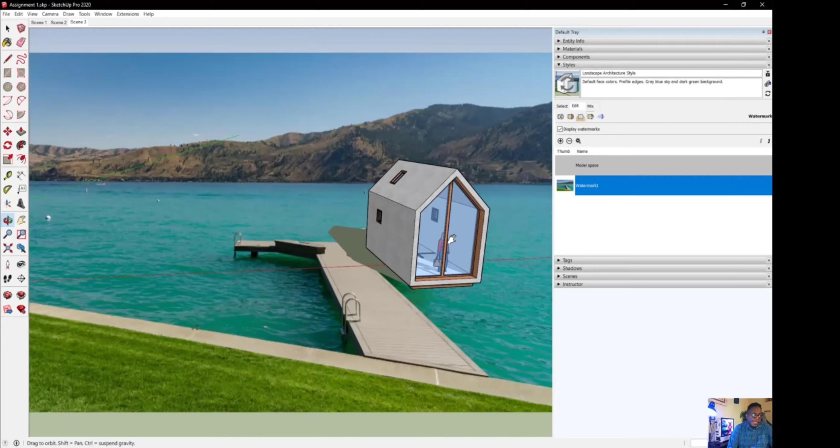It perhaps wants to come a little bit more that way, then perhaps wants to get a little bigger. So we're going to zoom in a bit. Now, when you're doing this, remember that this is a flat image.

So let's assume that we wanted to put the boathouse on this side beside the boat, right? So we want to do something like this. Let's say we want to do something like that. Well, of course, we're not able to put the house behind the boat because the boat is actually part of the image.

So what we have to do is imagine what it would look like behind the boat, and then we're going to do that manipulation when we go in Photoshop. So maybe it would need to be a little smaller, not too small.

You can also switch your view to X-ray. Not X-ray necessarily, but more, let's go to wireframe. There we go. Wireframe will kind of give you a better idea because you can see where the lines are lining up.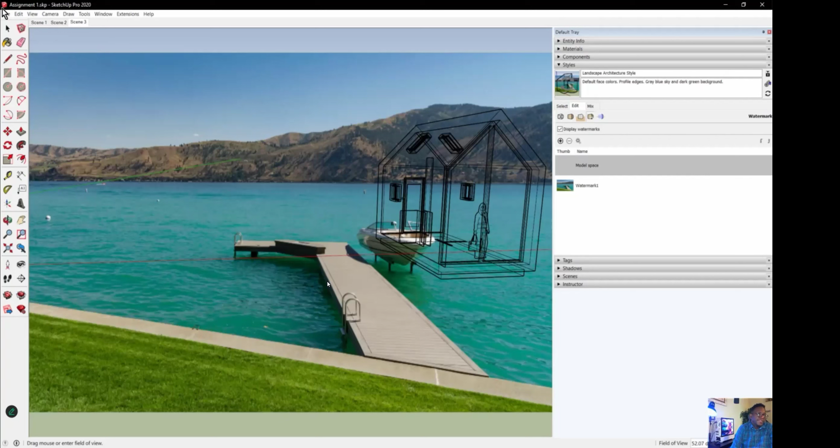Now, what I would say is that with the newer versions of SketchUp, I wouldn't necessarily use the camera view. I think it's a little bit overcomplex. What I would do in this case...

Hold on, oh, you're hearing me, right guys? Am I muted? Wait, can you hear me? I can hear you. Oh, okay. Yes sir, right, all right, cool.

Right, so what I was saying is... where's my SketchUp? Did it crash? There it is. Okay, I think it kind of crashed. Hold on, give me a second.

Right, here we go. All right, so let's say that you have your view like this, and... which background did I choose again? Let's go to the handout here.

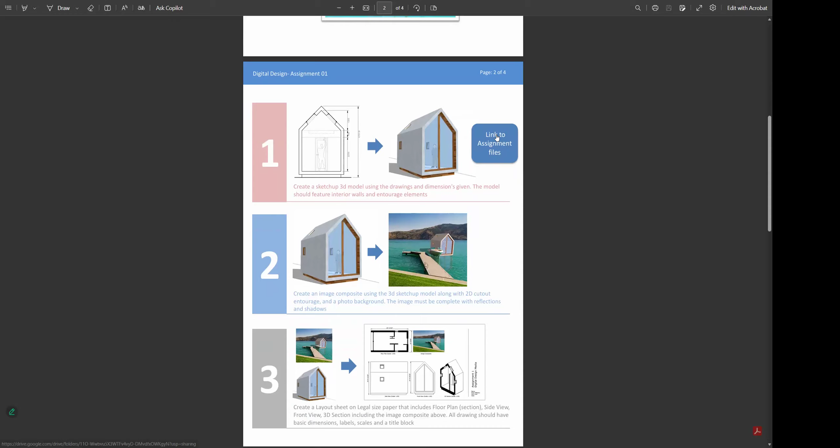Link to assignment files - this is where you go to find the backgrounds. Just click the link to assignment files and backgrounds, and here we go. All right, it was this one, right? Let me download that one. Cool.

All right, so bring out my tools there. Right, so what I was saying is that when you go to styles and you go to backgrounds where it says watermark, and you bring in your watermark. So let me go down to here, this one.

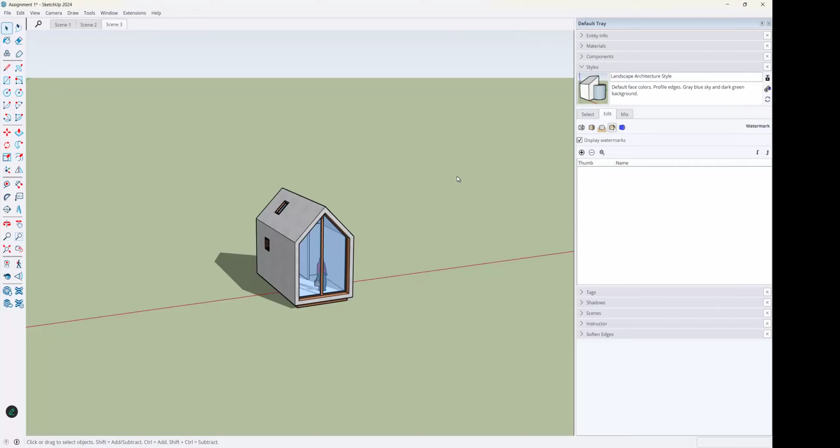Right. You want to do it as background, so background will make sure it's behind the model, and you want to make sure you lock the aspect ratio, guys, so that the image isn't stretched.

So what I was saying is, when you put it to wireframe mode, you go to view, face style, wireframe, or you can go X-ray, whichever one. I like wireframe. And you kind of align your view. Remember, you have to pan around a little bit, look at your lines. Then you probably also need to adjust your field of view a little bit, so you want it to be somewhat parallel. I think that is about it.

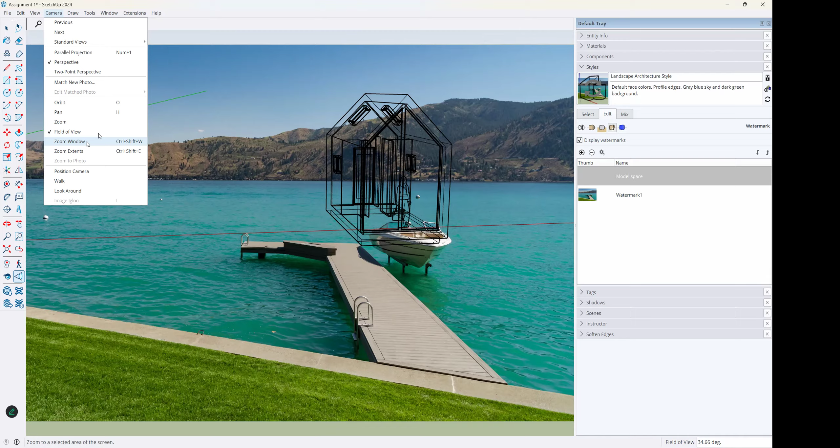Now, in my case, this is going behind the boat, so I'm going to ignore the boat. If it's going to go behind the boat, it would have to be somewhere up here. So, but because it's further, I might have to be adjusting the field of view a little bit. Oh, I'm still in the field of view.

So maybe like this, zoom out a little bit to make it smaller, then pan, then orbit. You know, trust me, you're going to be doing this for a little while. You'll soon get the hang of it, right? But this is just aligning the picture to match.

Right. Now to save this, guys, you're going to go to scenes, and then all you do, you click the little plus. Let me minimize this so you can see good. These are different scenes. So you click the plus, and you want to save a new scene. It will ask if you want to save the style. You can say you can save it as a new style, doesn't matter. And notice this save now as scene 4.

Now you can name this scene. There's a little preview there. And the reason why you do this is because let's say that you move this and you're doing other things, you can just double click here or here and it comes back to this view. All right, guys, so that's the important thing. So scenes is what we're gonna use to get this part done.

All right, let's continue.

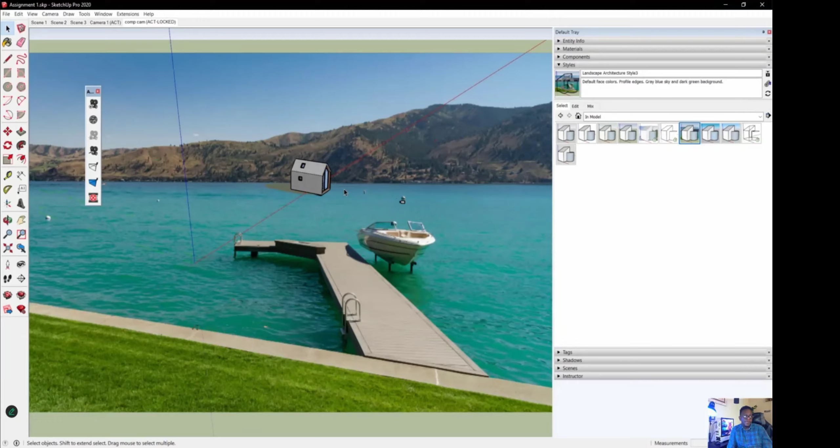Then you lock it again. All right, now once it's locked, I can move around and do other things that I want to do. So if, for example, you wanted to position maybe a person or make some edits to your building, you can go ahead and do that and not have to worry that you're moving your view. In this case, what I did here, I'm using the camera instead of scenes, but I think scenes is just way more simpler to use than camera. So that's why I'm suggesting you use the scenes feature, guys.

All right, there we go. Now the next thing that we want to do is we don't want to export this building with this kind of cartoon style. So what we're going to do is we're going to actually further edit this visual style. We're going to go to edit, and we are going to go to edges, and we're going to actually turn off edges and profiles. That will give us a little bit closer to a realistic look.

Now remember that we're actually editing our style here. I've actually renamed my style to Landscape Architecture Style 3, but I'm actually modifying this style even further. So I would need to, well, the styles are automatically saved. So every time I go back to this style, it will load back everything. Actually, it's not fully automatic. You do have to update the style.

So for example, if I turn on my edges and I want to update this new style now, I need to click this button here, and now my style is updated. If I want to turn off, if I want to make any kind of modification, I need to always update this style. Now you can know that your style is saved because if I go back to select styles and I select a totally different style like that, I can go back to my landscape architectural style 3 and everything should load back as how I had it.

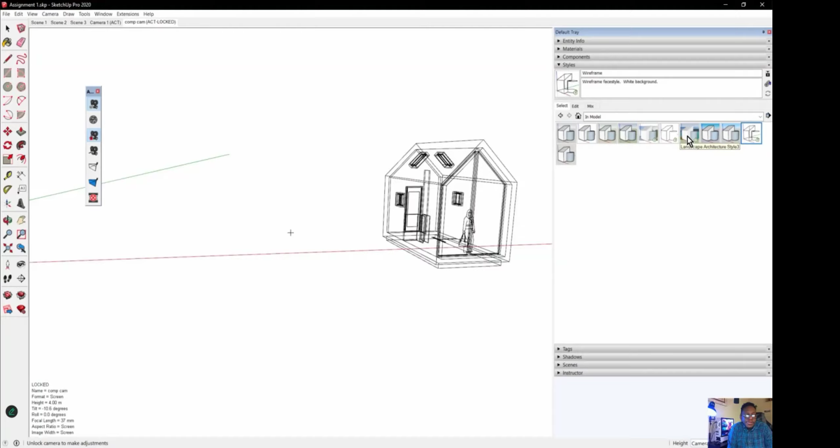Right? So you save your camera, you save your styles, because you might want to come back to make some modifications and go back into Photoshop again. Now, our next thing you want to do is to also adjust your shadows. To do that, you're going to go over to shadows. Let's minimize styles. And when you go over to shadows, you might notice that if you want to get

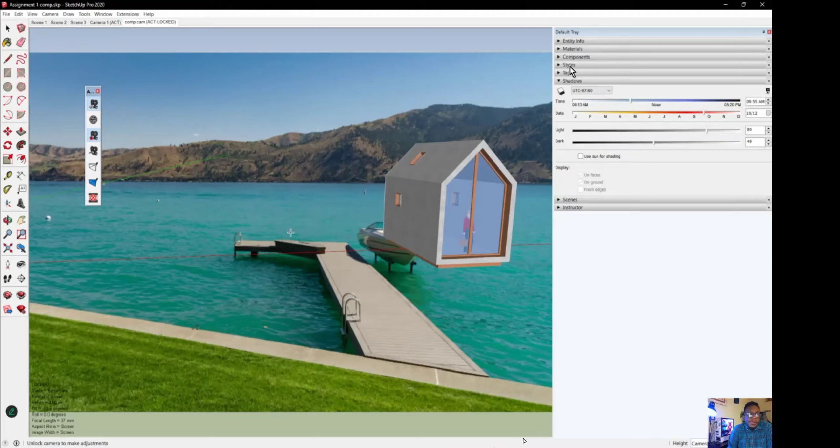Oh, my bad. Before I can get a transparent background, I actually need to turn off my background because I don't want my background from SketchUp. So let me cancel that and go back into Styles and Edit, and go over to Background, to Watermark. Right, there we go. And I'm actually going to delete this.

Now I can always get back my style if I want, so it doesn't necessarily matter. I almost think in the newer version of SketchUp you don't have to delete your background, I can't remember. Anyway, the safe thing to do is just turn off your background or remove it before you export, because we don't want the background with the building since we're going to put the background in Photoshop. We just use the background in SketchUp to align the building and save it, then when exporting the image from SketchUp, we don't want the background in there, definitely.

And it doesn't matter what the color of the background is, you just want to ensure that your background is plain. I would go with a... I don't think it should matter, but let's just leave the background as is. And then we're going to go to export 2D graphic again, but this time we're going to ensure that we choose PNG, and then under options we're going to make sure we choose transparent background. And then we're going to choose OK and export.

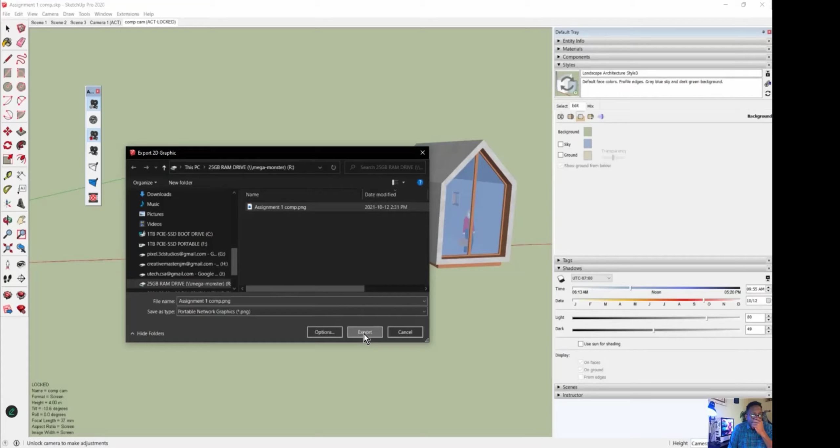And we're going to wait for SketchUp to generate this image. Now when you see the image, it's supposed to look like this, so there's nothing else in this scene but the background. Let's zoom in here, so that's a nice image there. And we're going to now work some magic in Photoshop.

Okay, now once you have Photoshop open, this time what we're going to do is we are actually going to open our background first in Photoshop. So we're going to go to File, Open, and we're going to find where we had that background. I'm going to go to Downloads, and that's the background that we got. Now it's important to open the background first, because the idea is that the background is going to be already aligned for us to the foreground.

Once the background is in, notice it comes in on a layer called background. I'm using my workspace layout for DDM that we created early on in the course. Now, the first thing we want to do is not use this as a background layer, but as a regular layer. So we'll right click it and go to layer from background, which turns it into a layer. We'll call this BG for background.

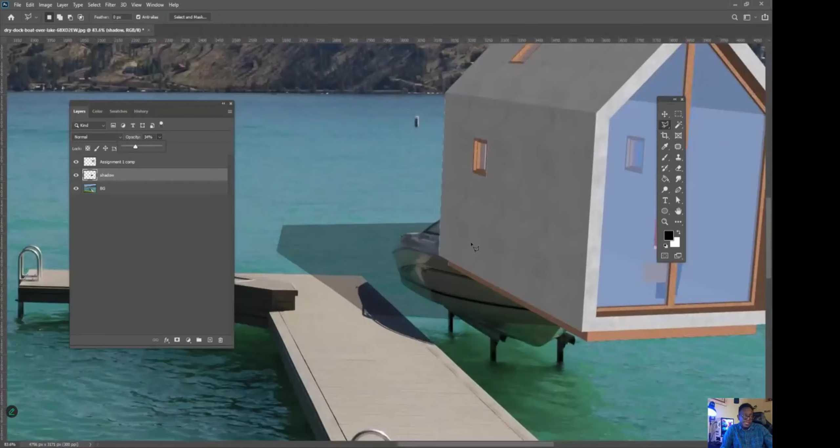Now what we need to do is deal with this boat - the building is obscuring the boat, but it should be the other way around. So let's turn off our shadow and turn off our building. For those of you who have objects that are supposed to obscure your 3D model, you'll need to cut out that object and put it on a layer above. In this case, the boat is doing that.

So I'm going to cut out the boat. I don't really need to cut out every aspect of it, so I'm using the polygonal lasso tool, and where it's getting too small, I'll use the plus button to zoom in a little. Basically we're just going to be cutting out this boat. You should remember how to do this by now - it's just like what we did in the other assignments, where you carefully choose the different areas around the boat and cut it out.

Special, go to paste in place. That's important, because when I do that, I'm actually just pasting a picture of the boat directly over the boat. Let me show you what I mean. If I turn off the background layer, I just have the boat by itself.

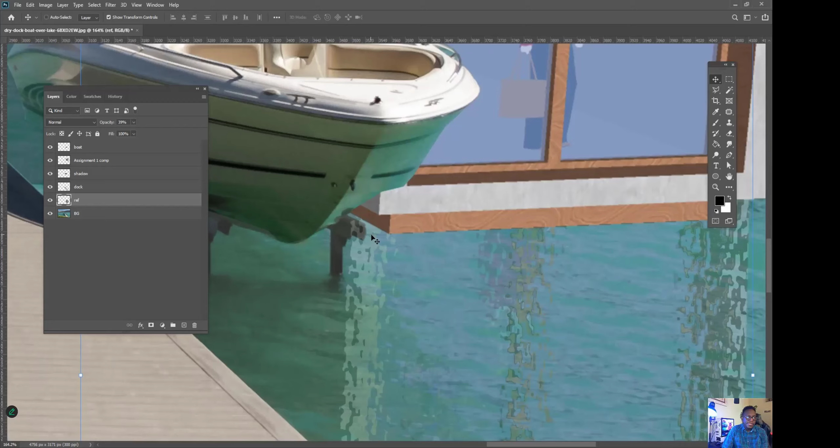There we go, just hit refresh and there we go. So you click assignment 1 - it's exactly as I showed you before, guys. Now, for those of you whose confidence level in SketchUp is not that much, also some persons not in this class...

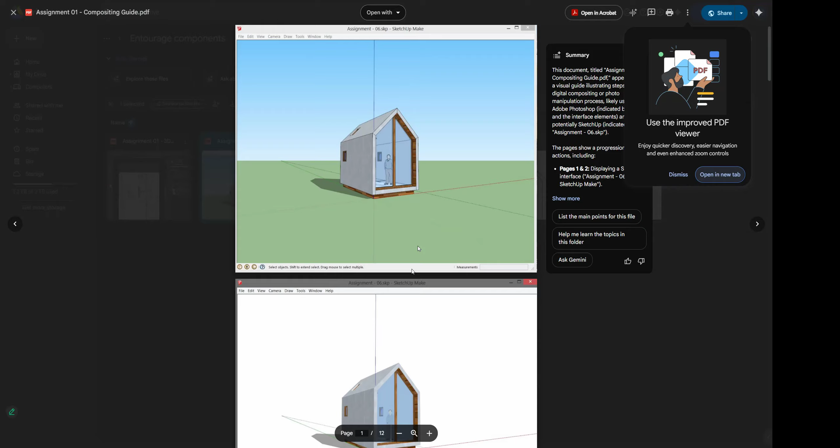And what is this? This is a compositing guide. What I went through a while ago, I created some screenshots in case you guys don't remember how to do that work, so this is a little tip to help you guys out. And this, I believe, is a modeling guide. I actually carried the image into Photoshop and cropped it down - you don't have to do that, but I did it. This is just me screenshotting how I did it. You don't necessarily have to follow me, but I placed the images in SketchUp, set my units, and then started to just trace it with boxes and all of these things.

Now, as I said guys, I'm gonna do a little video that can help you get started. Remember, we have a couple weeks to work on this, so I will check up on how you're doing next time we meet. By next time we meet, I'm hoping some of us would have at least started the modeling process.

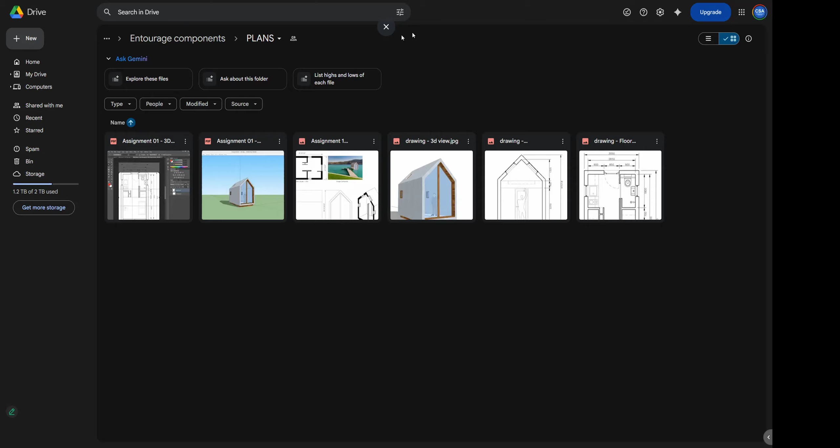Sir, don't forget to open the assignment again. All right, you mean this assignment that I just did? Yeah, assignment 1. It's not open on the portal yet. Oh, okay, no problem. Yeah, probably - so when you go to the submission, it's... Oh, you are not seeing it open on your end? Like when you click - which asset, this one here? Yeah sir, when I go on the site and try to click it, it's not. Oh, refresh - still locked? Yeah, refresh it and it should be open. Yeah, okay, yeah, I see it. Thank you. Yeah man, good.